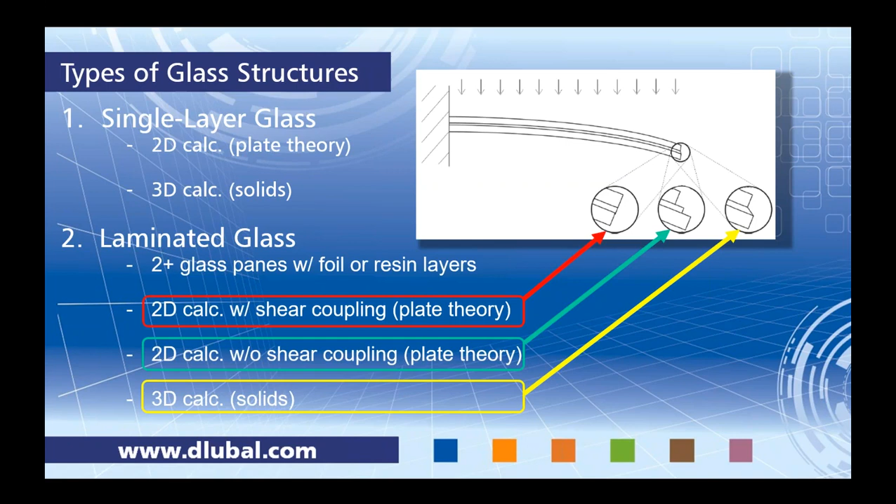Like I said, this is certainly the most accurate option. A downside to this, though, is that your solve time will be longer than typical plate theory.

Now, the third option is insulated glass, shown here in this picture. We have two glass panes on either side, a primary seal, a secondary seal, and then a spacer with our gas in between the two glass panes.

This will always use large deformation analysis. With the other two glass types, we can do a linear analysis or a large deformation, and typically with plate theory, you're running a linear analysis. But for insulated glass, we actually only give you the option for 3D calculation with solid elements. That's because when you throw in this gas layer, there's really no other way to get the accurate behavior of the shear coupling between the glass layers with anything other than solids, meaning that plate theory with 2D elements is not applicable for insulated glass.

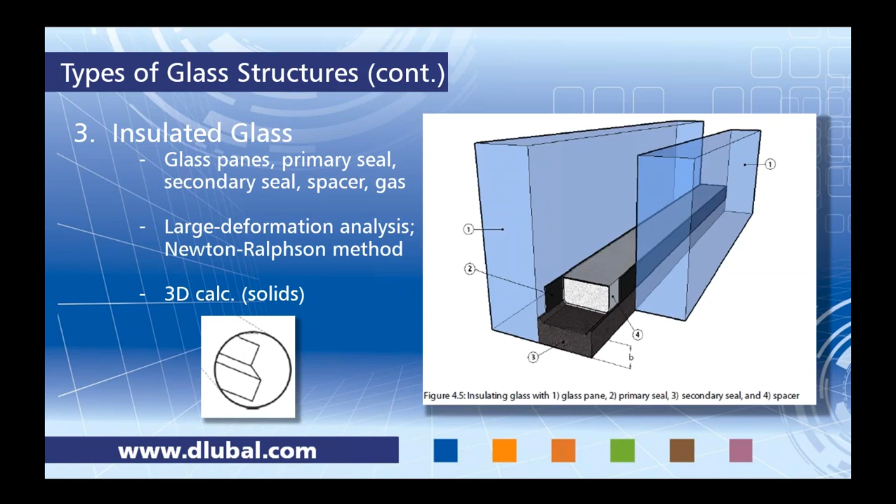I want to now discuss the calculation types in RF Glass. Over here on the right is our add-on module, RF Glass, just a dialog box. Down at the bottom, you will see that we have two different calculation types to choose from, either local or global. This section might seem a little confusing now, but as we run through our examples today, it will make more sense.

So the first being a local calculation. That is where an individual glass surface is analyzed in RF Glass. Despite having any supports or boundary members drawn in RFEM, we have to redefine those supports and boundary members in RF Glass. With the local calculation, we can either do a 2D or 3D plate theory or solid analysis. And with insulated glass, this always falls under the local calculation because, like I said, we can only do a 3D analysis type with insulated glass.

Now, the other option is a global analysis where the entire model in RFEM is considered. So therefore, things like supports and boundary members that were originally modeled in RFEM will be taken into RF Glass. The caveat with this is that we can only do 2D plate theory for this type of analysis. You can see here from this picture essentially what I'm talking about.

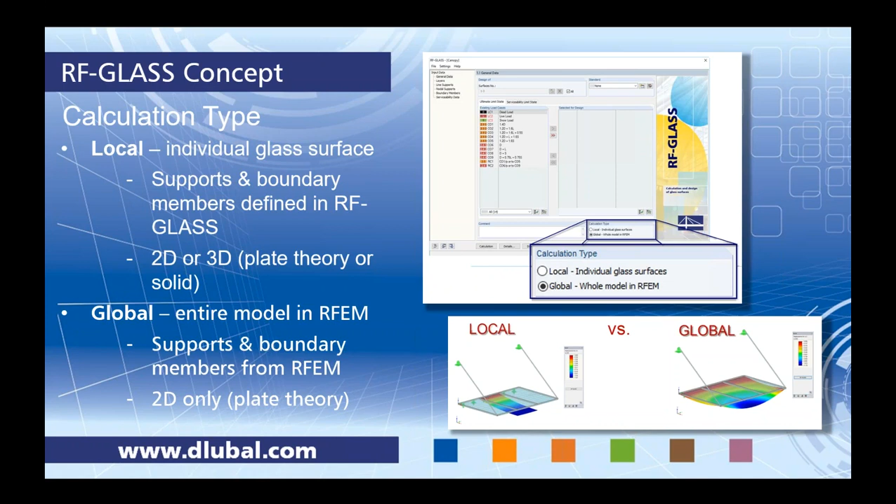The other reason being that the support types as well as the boundary members can be identified in RF Glass in much more detail than what you could ever do in RFEM. So that's kind of the advantage. Again, we'll see that when we go through some examples today of local versus global.

So with that, we can jump into RFEM. When you begin a new model, you will see this general data box pop up. We just need to first give it a model name, so I gave it some arbitrary name. I have the load combination set to ASCE 7. You can see here that we have the Canadian load combinations as well as many international codes as well, and then I have the checkbox to create those combinations automatically.

I also always open up my template model. Any model can be saved as a template model, meaning that maybe you have your grid settings the way you'd like, your printout report, your unit set exactly how you want. So then every time you open this template model, everything is ready to go. You don't need to adjust anything next time when you open up a new model. So if I click OK, then this will go ahead and open up a new model for us.

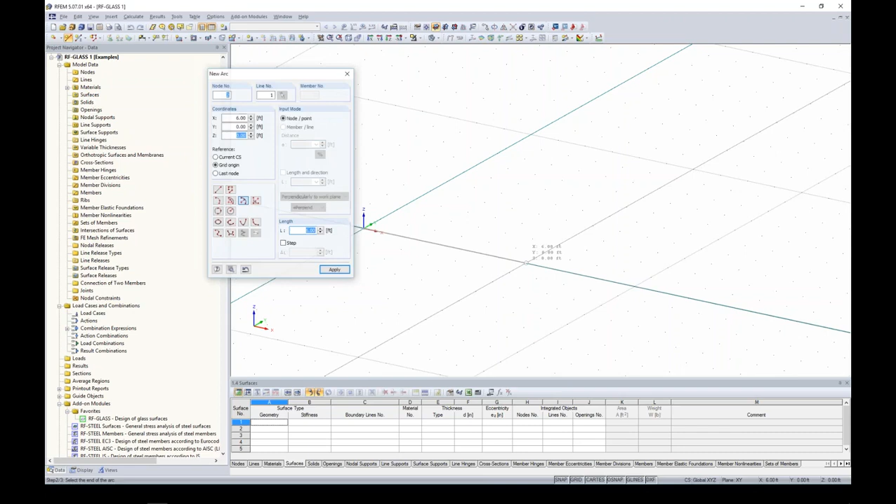For this option, I'm going to choose an arc by defining first my points at 0 and 0, and then I'm going to use my snap point to 6 feet. Now you can see I want to define my radius. I want to actually reverse the orientation and define my radius at 6 feet.

So now I just have a simple line element. This isn't a member, it's just a line. And then I can actually select this line, right-click, and extrude the line into a surface.

If you were present in my last webinar on cross-laminated timber, the glass module somewhat acts the same way. The program is asking us now what material do we want to use when extruding this line into a surface. Realistically this doesn't matter right now for glass - this concrete is just a placeholder. So it doesn't matter if I choose concrete, steel, or aluminum; it's simply a placeholder.

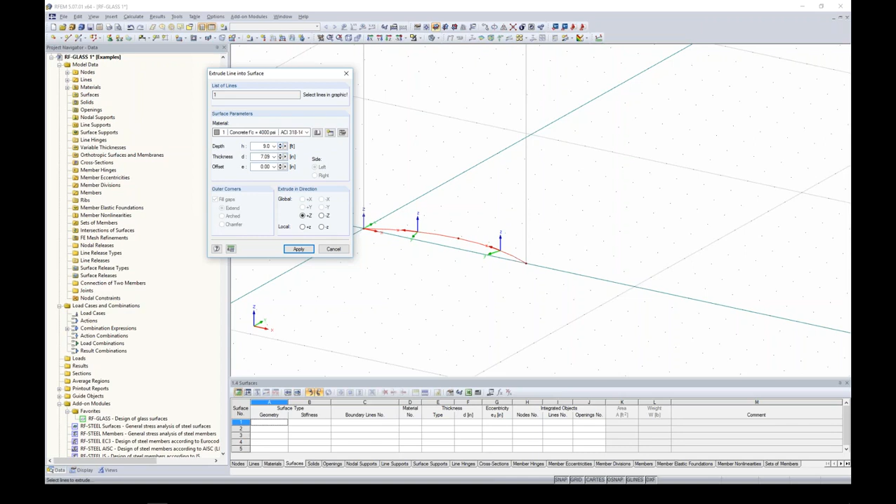The height, though, we do want to specify the correct geometry in the program, with the exception of the thickness. Thickness doesn't matter either because all of our layers and such we will be defining in RF glass. So if I hit apply, then I can see that I have this surface now created with just a few clicks of a button.

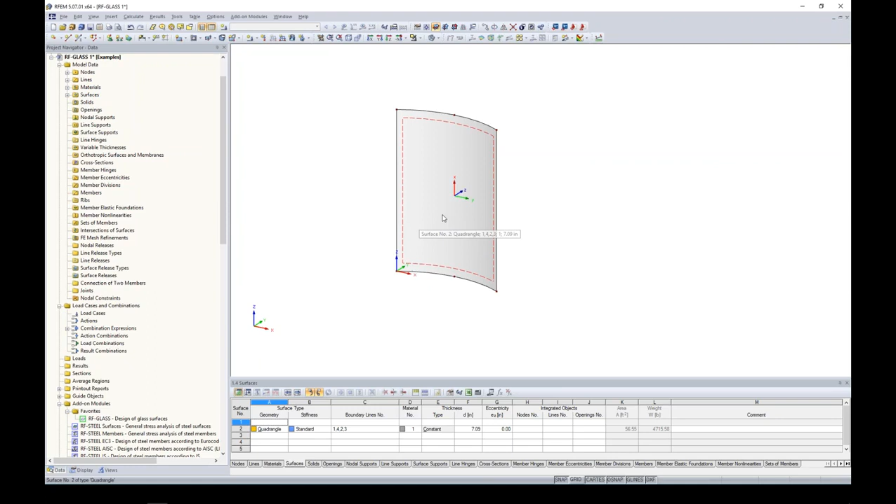The next thing to consider is maybe we have some type of handrail on our glass panel here, and I don't want to model the handrail itself, but I'd like to create a line so that I can add in a line load to this surface.

So all I'm going to do is select this bottom line here and use my move and copy tool and move it up 3 feet in the positive Z direction. Now you can see that that line is integrated in that surface.

So quickly adding some load cases, here I will go ahead and add my first load case, dead load, and you can see that the self weight is automatically checked on for self weight.

I'm going to create a new load case called wind load pressure. You always want to define the correct action category, and the reason why is the program automatically created all of these ASCE load combinations. If you don't apply the correct action category, then you're going to get the wrong load factors.

So I'm going to make a quick copy of wind load pressure, but call this one suction, and then make one more load case of live load and give it the live action category. Okay, so I can click OK here. Now, if I go to my drop-down box, you'll see that the program automatically created all of those ASCE load combinations. I'm going to skip dead load for now.

We'll just consider self-weight, but for wind load pressure, we want to add our first surface load on. If I right-click, I can turn on my local axis system, and I want to add a new surface load. Because we have a curved surface, I want to apply this wind load pressure on my surface in the local Z direction. You'll notice down here the little picture updates depending on what direction you're applying your load to, which is nice. So in this case, I want the local Z direction.

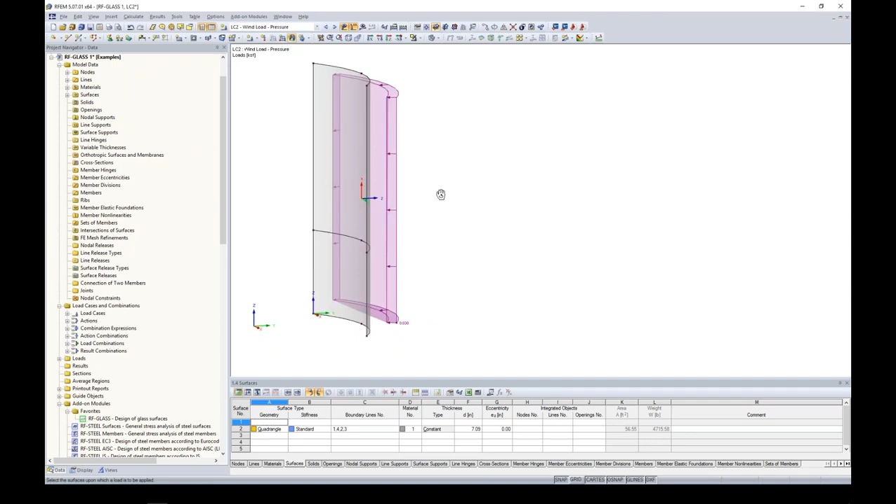I'm going to switch load cases to suction. I'm going to again add a new load in the local Z direction, but this time it will be 0.02 KSF on the other side.

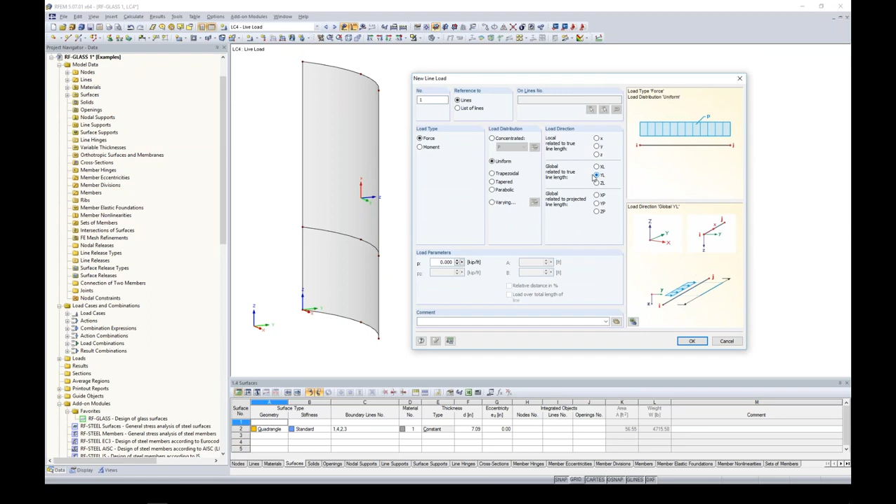And then lastly, we have live load, where I will add in a new line load. This I'm going to apply in the global Y direction with a magnitude of 0.07. And then all I need to do is click on that line.

So now we have all of our loads added to this surface, and all of our load combinations are done. I want to check my finite element mesh settings. So if I go to calculate and FE mesh settings, the default is set at 1 foot.

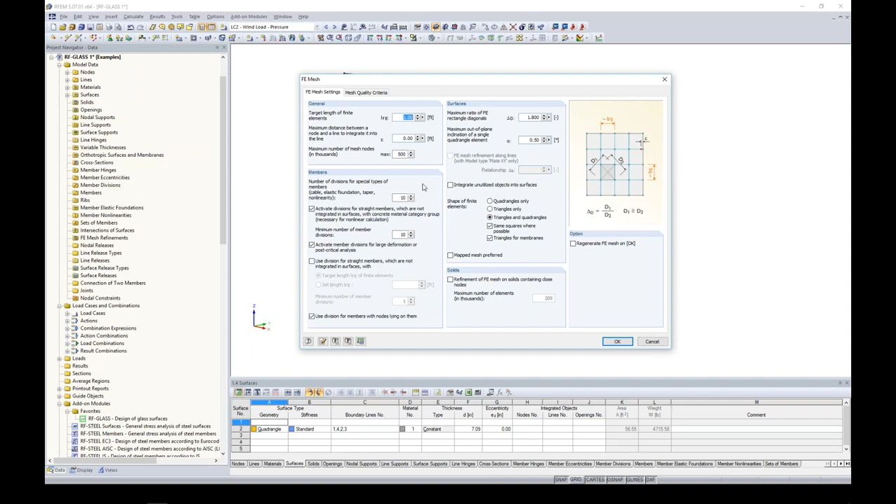The length of 1 foot would probably be okay in this situation since we don't have much going on in this surface, but it's only 6 by 9 feet, so maybe we want to decrease this to something more like 0.5 feet.

If I go to calculate, generate FE mesh, now we can see the FE mesh is automatically generated. Keep in mind this is different than some of the other programs in that all finite element meshing is done automatically. If I were to move this line up an inch, everything would automatically be readjusted, so you never have to worry about changes happening in your model and the finite element having to readjust manually.

Everything is done automatically. Now we are ready to jump into our add-on module. So we have this extremely long list of add-on modules, but if I right-click on any of them, I can select it as my favorite, which will automatically move it up to the top of the list. So now I can launch RF Glass.

Taking a look at RF Glass, as I mentioned, this is the add-on module, nothing more than a dialog box. You can see here that all of our load combinations were brought over from RFEM. The first question it's asking us is what surface do we want to design, and you can check the all checkbox since we only have one surface. Now the other thing to note is that we do have the German annex for the standard to go ahead and do glass design.

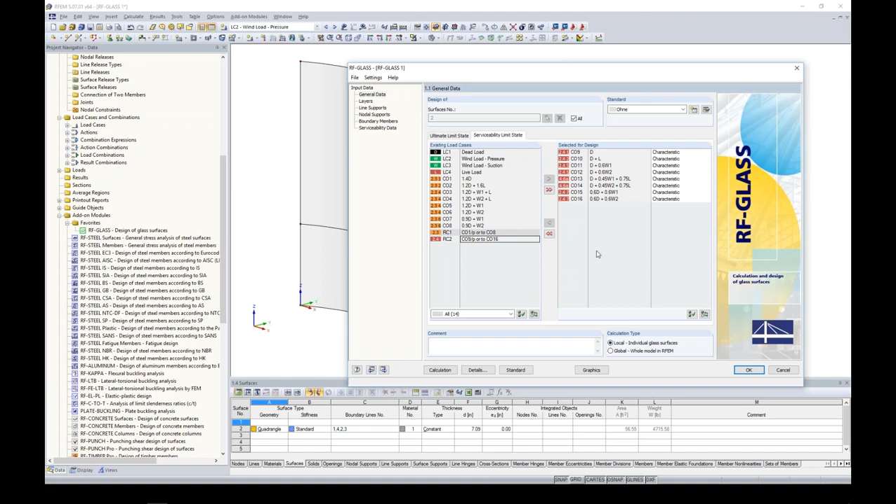And remember back to the PowerPoint, this is what we were discussing on local versus global. My two examples now will be local. So the first one will be local, individual glass surface. We'll focus on that and then we'll get into global a little bit later.

And with any add-on module, you just simply work down the list. Extremely intuitive to use. The program kind of sets up your workflow for you.

So we're moving on to layers here. It's asking us, okay, so we can create a new composition. You can rename this, and you can create as many compositions as you'd like for different surfaces in your model. For us, we'll obviously only have one composition for our one surface.

We need to select which surface this applies to, and we can define our first layer type. So our first layer type will be glass, and here will be the option to jump into our material libraries database. Typically the standard when you select this will be under the material category glass, and all of these options will be listed. We don't quite yet have the ASTM materials in there, but that's no problem at all.

I added this thermally toughened float glass to my ASTM standard. So anytime that you add a new material, this will of course be remembered for any future files or models that you create with this glass module.

All of our properties are shown in the same dialog box, so everything is okay there. Now my thickness, I want it to be 0.2 inches. Again, all of our material properties are shown to the right here.

Our next layer will be foil. And believe it or not, we actually do have a lot of ASTM foil materials already integrated in the program. For this particular case, I will use 20 degrees Celsius at 1 minute. Again, the foil material properties are shown here. The thickness of 0.01 inches is fine.

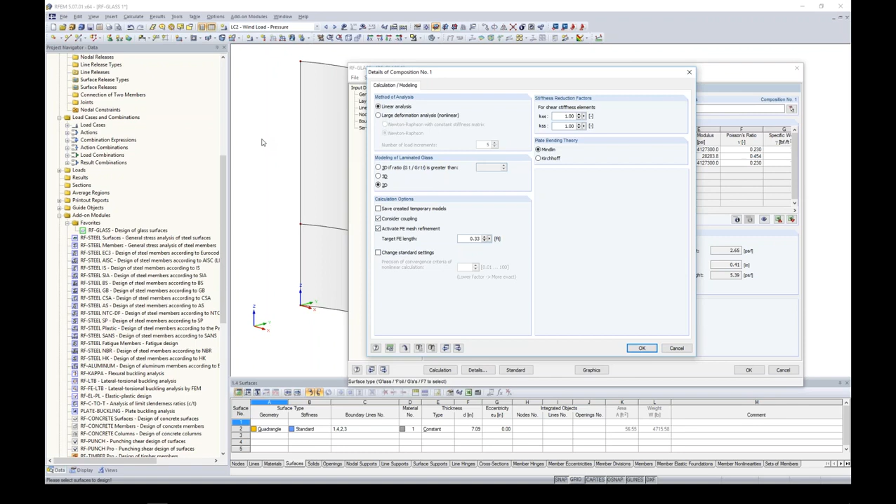Consider coupling. Remember, with plate theory, we either have rigid coupling or no coupling at all. If I uncheck coupling, I no longer have the option to turn it to a solid analysis. Activate FE mesh refinement—this is if you wanted to change your FE mesh of this surface only, or any of the surfaces you define for this composition. This is nice because I don't have to go back into RFEM and redo my finite element mesh if all I want to change is simply the surface in here. So that's certainly an option as well.

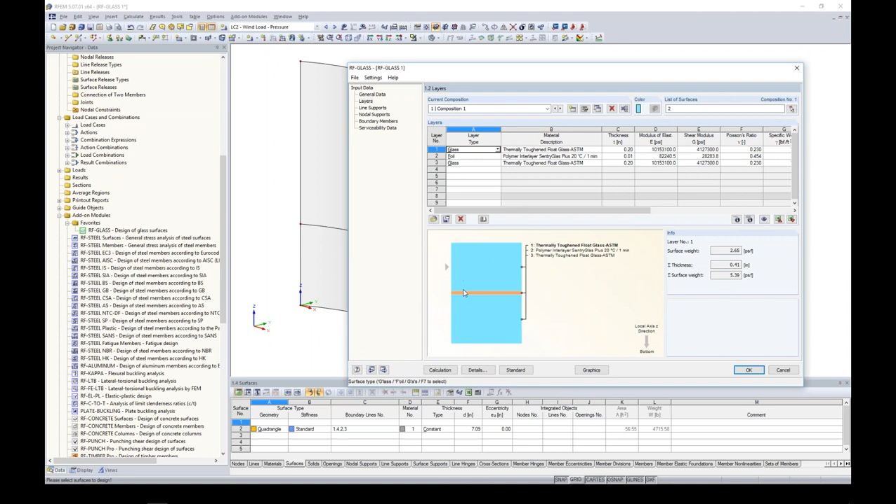Also notice we get this nice picture of the different glass layers. Depending on which line I'm clicking on here, this arrow will be synced with whichever layer is shown in this little diagram. Something important to note: the local axis Z positive direction is facing towards the bottom of the glass. So this is the bottom of the glass, and the positive Z axis of our surface is also pointing towards the bottom. For this example it doesn't really matter because we have symmetry between the top and bottom layers, but our next example will be different since we won't have symmetry.

So you want to make sure that the local Z-axis and the bottom of your glass are aligned correctly. Moving on down our list: line supports. In RFEM, I didn't define any line support, so if I were to try and run that model right now, I'd obviously get an instability because I have nothing supporting that surface. This is where, in RF Glass, we can go ahead and define these line supports.

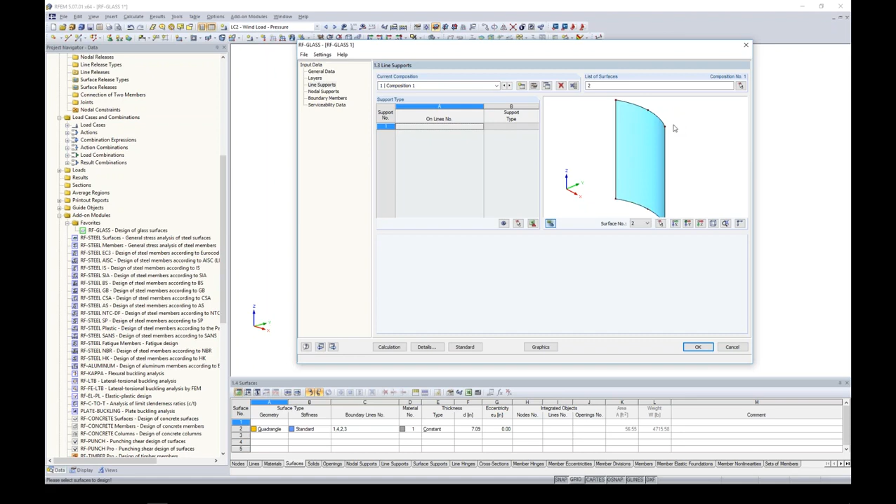The first thing I need to do—you'll notice here I have my picture, I can rotate it, I can scroll in—is to choose my first lines. So if I choose them graphically, using my AutoCAD-type features of just dragging a selection box, I chose the left and top lines here. And if I click on support type, you'll see all these different hinged options. As I scroll through these, you'll notice the support types are changing down here.

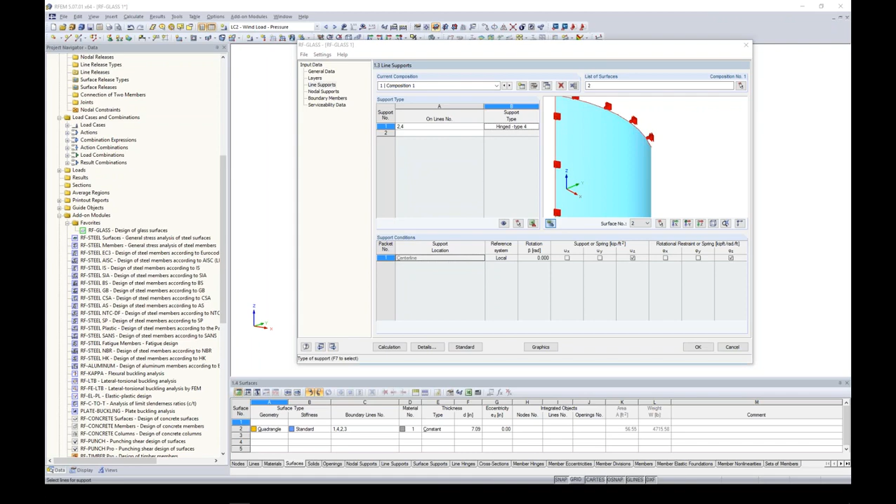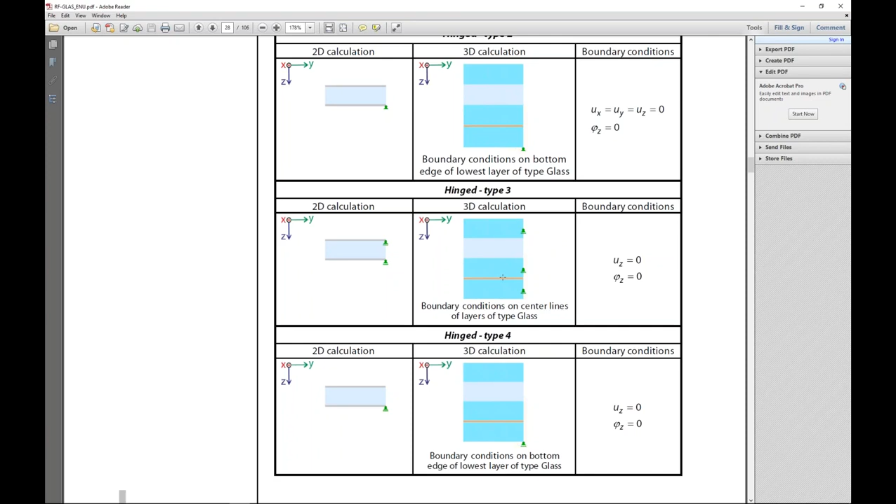If this still doesn't make a lot of sense, you can always click on this help manual here, which brings up our manual for RF Glass. If you scroll down a bit, here are all these different hinge types. It's set up nicely: if you're doing plate theory under the 2D calculation, this is how the hinge type will look. Now if we're doing a solid model, this is how hinge type 1, hinge type 2 would look. This is what I was saying—the benefit of using a local analysis in RF Glass is that you can get very detailed in how your glass layers are supported. In RFEM, you don't have these options; you can do it, it's just much more complicated. So in RF Glass, it allows you to get a little more detailed.

So for us, we will choose hinge type 3. Then I want to choose my other two lines here.

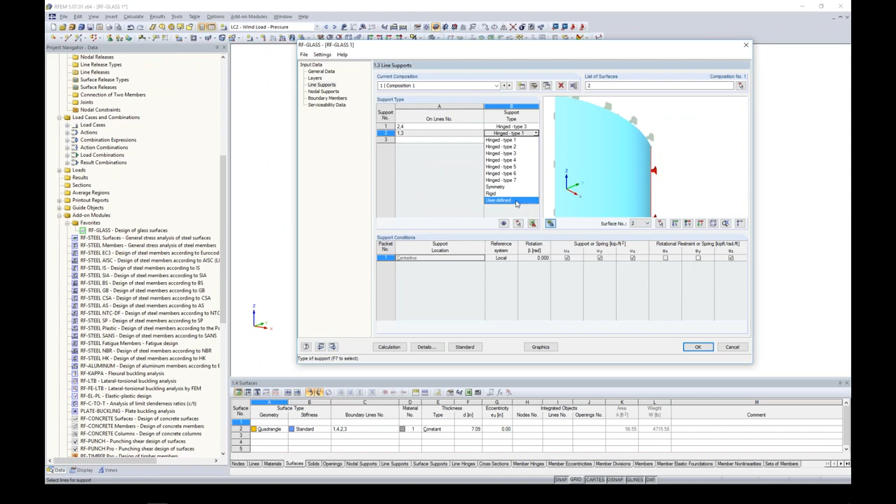And I can always select a user defined type as well. I don't have to use these already determined hinge types in here, and maybe I want to unselect translation in the X direction. Keep in mind you can always select springs as well, so you don't necessarily just have to have a free or fixed situation.

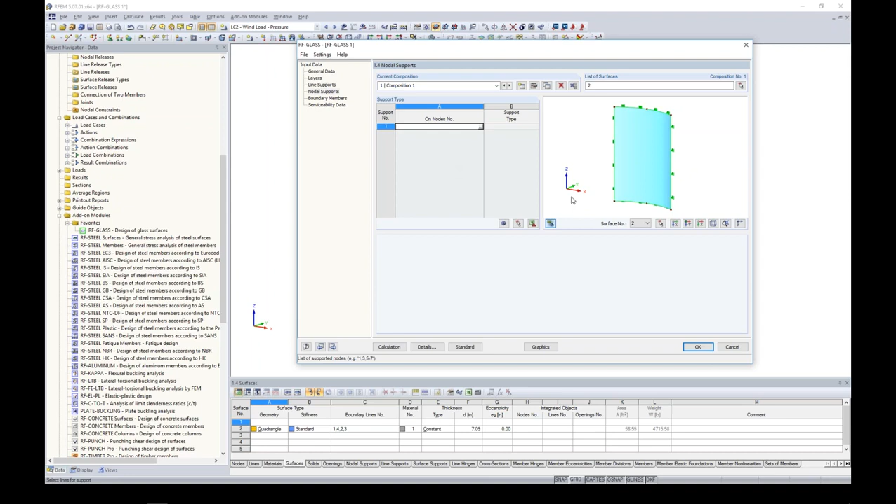Moving on down the line to nodal supports, exact same concept. Just if you were to have nodal supports instead of line supports, this is where you would go ahead and define it. Boundary members: it's not uncommon to maybe have something like a channel member up at the top here of our glass surface.

Well, I didn't model that in RFEM, and because I'm using the local glass analysis type, I want to define that boundary member here. So the first thing I need to do is select where I want that member to run. You'll notice that everything is just set to center line because I'm using 2D plate analysis, and I don't have any cross sections defined in RFEM. Normally you'd think you need to go back into RFEM to create some cross sections, but the nice thing is I can do everything from this add-on module.

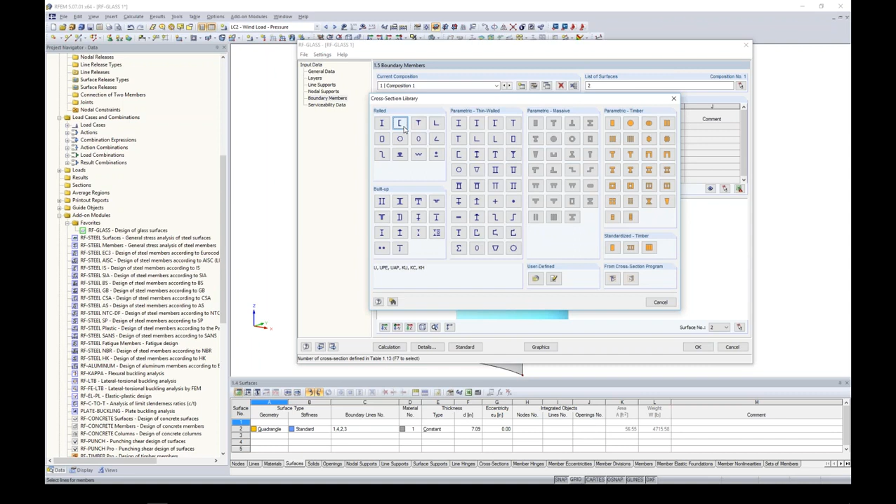So up pops my cross section library. For this case, maybe I'll choose a type of channel here just for geometry purposes, and here are all my AISC shapes. Maybe I want a 3x5.

Concrete is obviously not the right material for this, so we can easily edit this as well and jump into our material database. Maybe we want something more like aluminum from the ADM. Well, I already have aluminum set in one of my favorites group for USA as 6063 T6.

Here are all of my properties for that particular material. I can click OK in all of these, and if I zoom in, I have a nice rendered shape of my channel. You can also rotate it if you need, and the program will automatically update that as well.

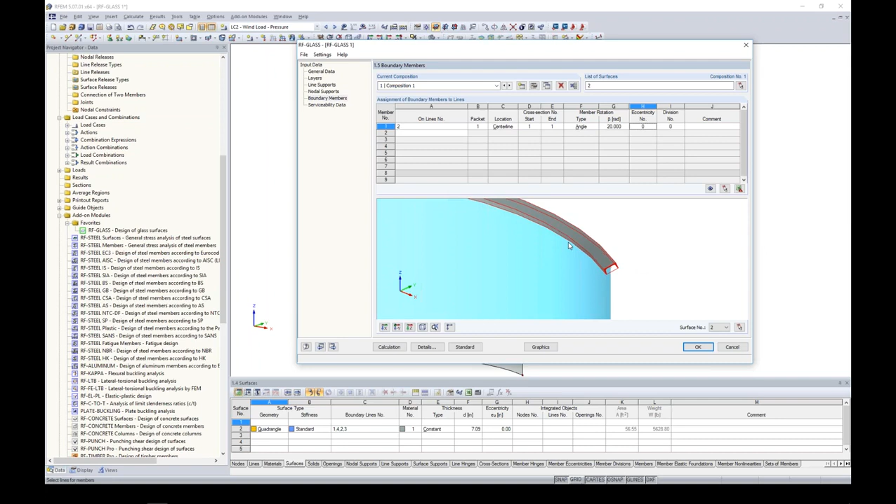So for analysis purposes, we certainly want to take into account the stiffness from this member here. That's the whole purpose of defining boundary members. Maybe you have a boundary member with nodal supports on either side instead of a line support. That can all be modeled in here as well. So this is just for example purposes, I will delete this for now.

And lastly, we will jump into the serviceability data. This is nice in the sense that if I go to my standard button down here, I have my serviceability limiting deflection ratios. I have 3 different types of combinations: characteristic, frequent, and quasi-permanent, and you can see that I can change these ratios for these 3 different combination types to whatever I'd like.

Default is L over 100, and for cantilevers it's L over 50. If I go back to my very first tab under serviceability, here's where those 3 different combination types fall into place. So if you want different limiting deflection ratios for these different serviceability load combinations, it's possible to do it in one analysis without having to rerun several times with different deflection ratios.

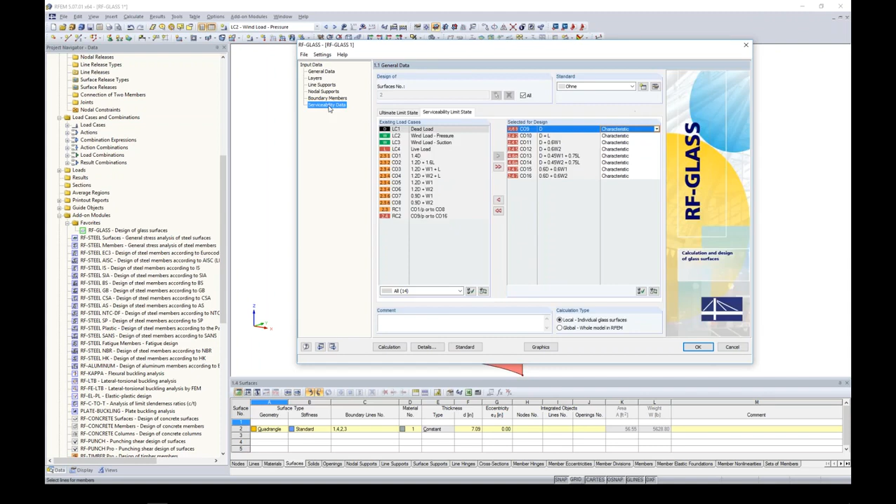The only thing I need to define is my surface. Now the reference length - do I want to use the minimum border line, the maximum border line, or do I want to define my own? In our case, a conservative option would be the minimum border line at 6.28 feet, and if it was a cantilever, I could check this option here.

Last thing to check is the details button. You can see that we have all of these options for what stresses we want to show in the final analysis. So I can easily uncheck any of these if I don't want to see them, or check them if I do. Under the results, there are a few other options for what you want to see in your calculations. For example, maybe we want to see line support reactions. And with that, we are ready to solve.

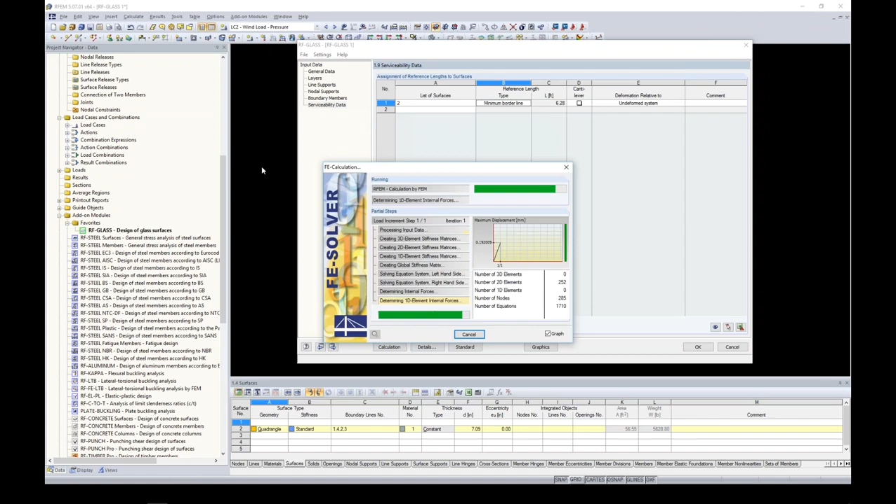So what the program's doing now is it's taking each stiffness layer from the glass, creating a more global stiffness, exporting it back into RFEM, rerunning the analysis, and now bringing all of the results back into RF Glass.

And now we have this results menu available. Here we can view our max stresses and our ratios by either the loading. So we have our different load combinations, load combination number 1, number 2, number 3, and remember this is ultimate limit design. We also have our max stress ratio by the surface.

We only have one surface defined, so of course we only have surface number 2 shown here. And then we have our max stress ratio by the composition. We only have one composition defined. And with this, we will get our different stresses for the different layers, layer number 1 and number 3. We have our existing stresses due to the actual load combination, and then we have our limiting stresses. And of course, we get a ratio.

The max ratio is shown down here. We have a nice green smiley face because he's well under 1.0.

The other thing to note is that you can export this directly into Excel. Excel obviously has a lot more capabilities in terms of sorting data and such. So this is a nice feature to have, if you want a little bit more control, just click the button. It automatically opens up Excel and brings all of your data in there automatically.

You'll see here that we have our stress diagram shown. We have a rigid coupling, so viewing the stress diagram, this makes sense for what we're seeing. We have obviously a relationship between our top layer and our bottom layer with our stresses, and in between is the foil layer.

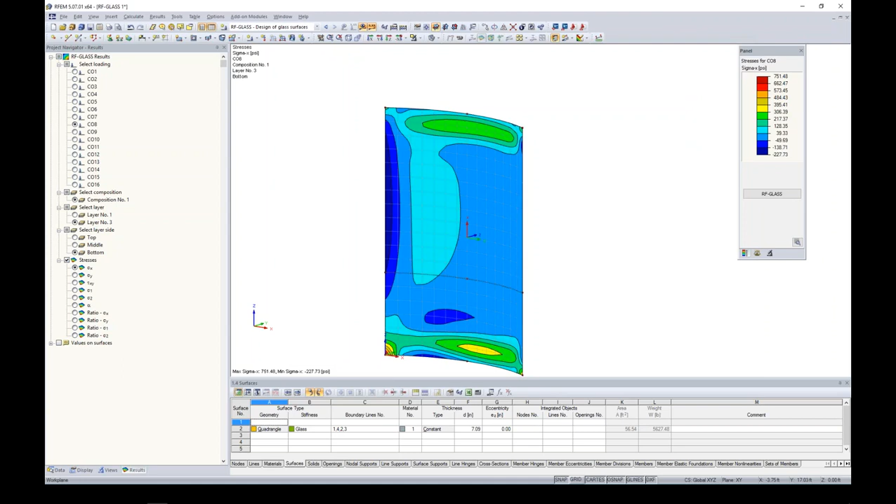Jumping back to the max stress ratios by either loading, surface, composition, there's another option down here called graphics. And with graphics, this will immediately bring us back into RFEM. And here we can view the different stresses by contour lines. So you'll notice that the results option popped up here in our project navigator.

If I look up here, it shows me that I'm still under RF glass. Even my drop down here shows me I'm under the results of RF glass, and here I can easily jump right back into that add-on module. So it's nice here if you want to visually see what's going on with these different stresses.

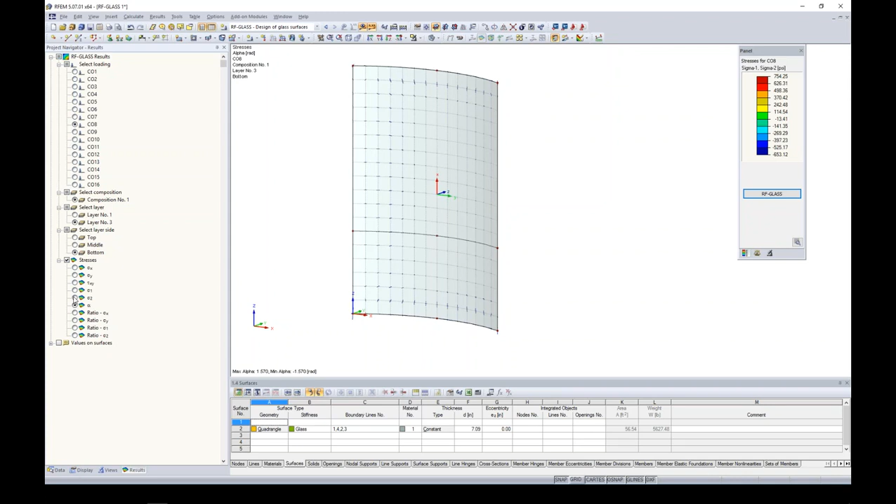Okay, so that concludes the first example. Now, for the second example, I'm going to use this same surface, but I'm going to turn this into an insulated glass example. Time savings, the geometry is already created, the loading's already created, and we're just going to see a lot of the similarities and differences between a 2D plate theory versus an insulated glass solid model.

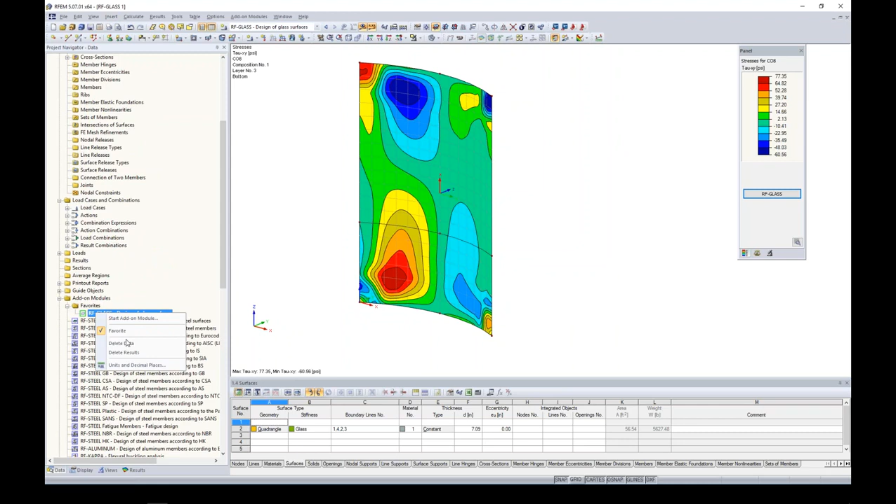I'm back in my data tab under my project navigator, and what I can do is actually just right click here on RF glass and delete all of my data. It's asking me, do I really want to delete this? Yes, I do, and we are back to square one with just a simple glass surface shown now.

So here I will launch my RF glass again, and we don't need to spend much time on some of this. One thing I do want to do real quick that I forgot, let's go back into our load cases, and I want to create one more load case here called climatic load. This is for my gas pressures of my insulating glass that I'm about to create.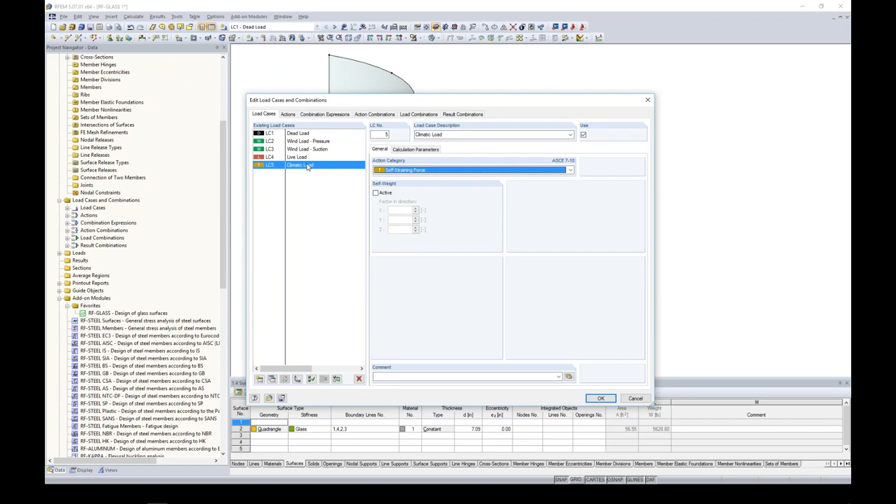I'm going to create a new load case here called self-straining force. You certainly can put your climatic loads into any one of these load cases that you want, but keep in mind, maybe climatic loads you want a load factor of 1.0. When you put it in with dead load, well, now it has the same load factors as dead load. So most likely you're going to want to keep them separate from these other action categories, which is why I created climatic load. This does have a load factor in our ASCE load combinations of 1.0.

So I can launch RF glass again. Now you can see that my load cases are a little bit longer. I now have this T for temperature included in here as well. So for ultimate limit state design, I'm choosing all of my LRFD equations, and for serviceability, I will choose all of my ASD load combinations.

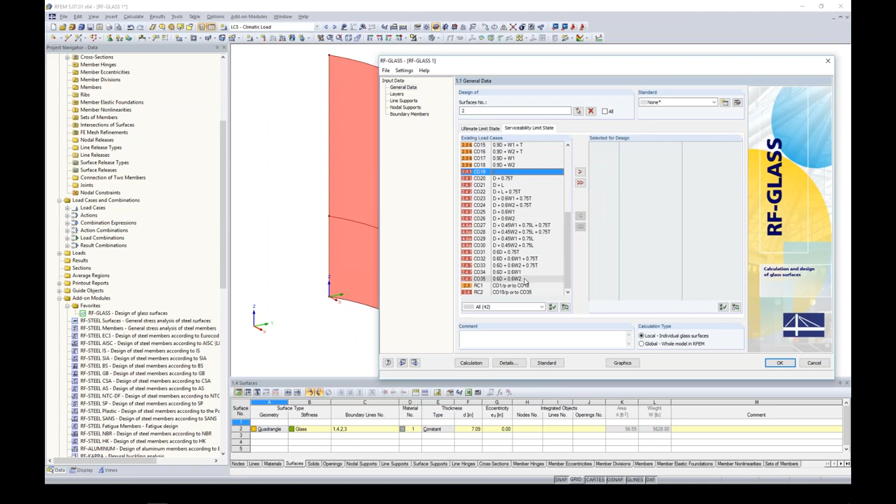We are still going to stick with the German norm here for our standard, and the calculation type will be local. Again, this is another local design, but you'll see here under layers that we want to first choose our surface. Nothing new here. Now our first layer type will be glass. The program remembers the ASTM. This time I want a thickness of 0.6.

And then I want to create my next layer of gas. The minute I put in a gas layer, the add-on module says, okay, this has to be a solid analysis. I can no longer do plate theory. That's just a limiting effect. When you choose gas, there's no way to do a plate analysis.

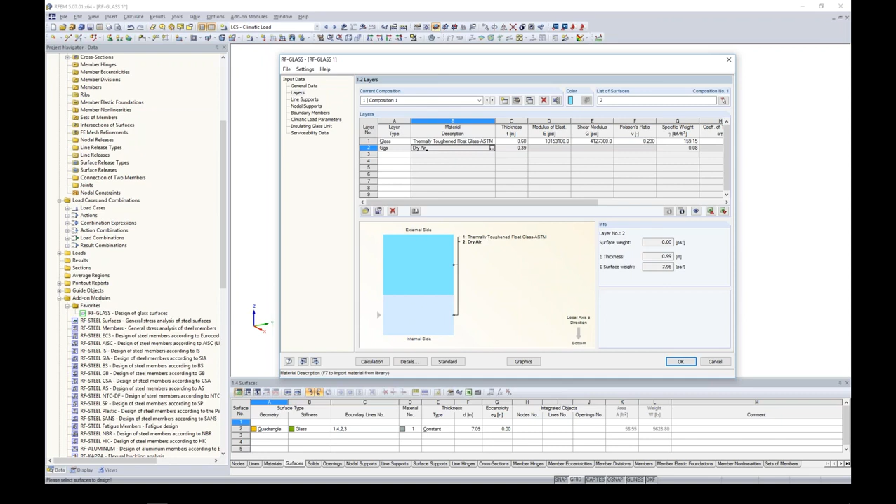For my materials library, for my gases, these are the options that are already default in the program. Argon is a pretty common one for insulating glass. Here are our properties, again shown here. Maybe I want my thickness to be 0.65. I'm going to choose another glass layer of 0.50. And then a foil layer, we'll keep it at 0.01, that's fine. And lastly, one more glass layer at 0.5.

Now let's take a look at our details of this composition. You'll notice some changes in comparison to what we were viewing last time. Linear analysis, no longer an option. We only can do large deformation analysis. As I mentioned, Newton-Raphson is the type of large deformation analysis we will do.

You do have the option here to choose a constant stiffness matrix. This will obviously speed up your calculation time a little bit, but maybe not as accurate of results because you're not getting that nonlinear behavior with the different stiffness matrix for each iteration. It's up to you though on which option you'd like to choose.

Number of load increments runs parallel with our finite element mesh. Anybody who's done finite element modeling knows that if you have an extremely large mesh, you can get very inaccurate results. However, if you continue to submesh your elements to something very small, your solve time also increases, and at some point your results aren't going to change very much. It's the exact same thing with load increments. Maybe one load increment won't give you the correct results, but maybe 10 is too many. It slows down your solve time, and your results aren't any different than what 5 load increments would have been. Default is 5 here, but you can certainly change this if you'd like.

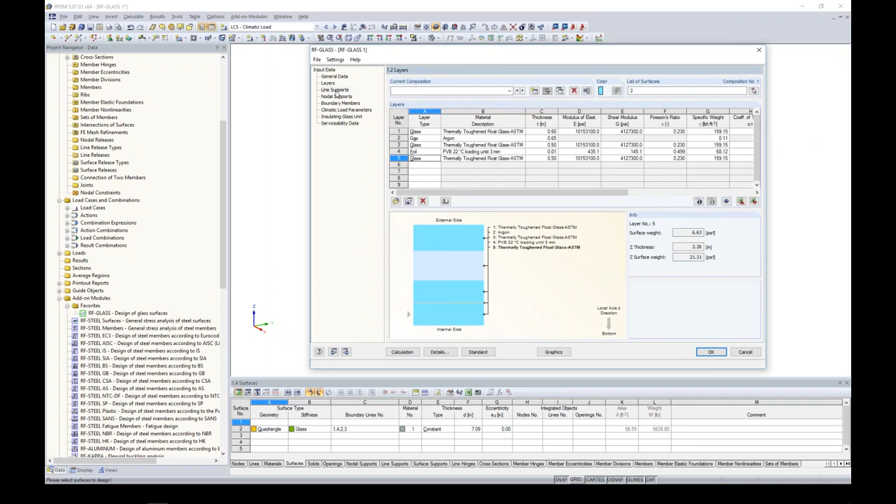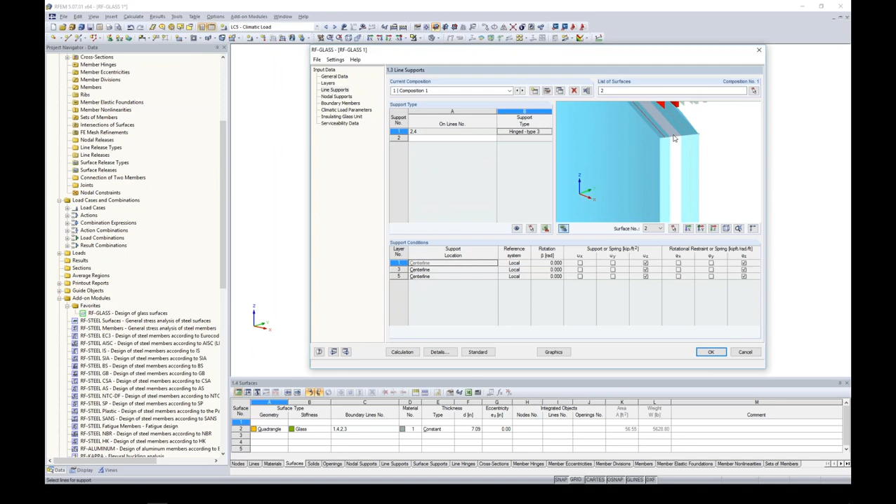Moving on down the line to supports, nothing new here for the most part, so I'll quickly run through this. There is one thing that I do want to show you. If I choose Hinge Type 3, just like we did last time, you'll notice now that I have 3 different layers, whereas before I only had one option. So with solid elements, if I zoom in here, you can see I have these different solid elements where I can apply these line supports at the different layers. As I scroll through here in the table, the little picture updates on which layer I'm at.

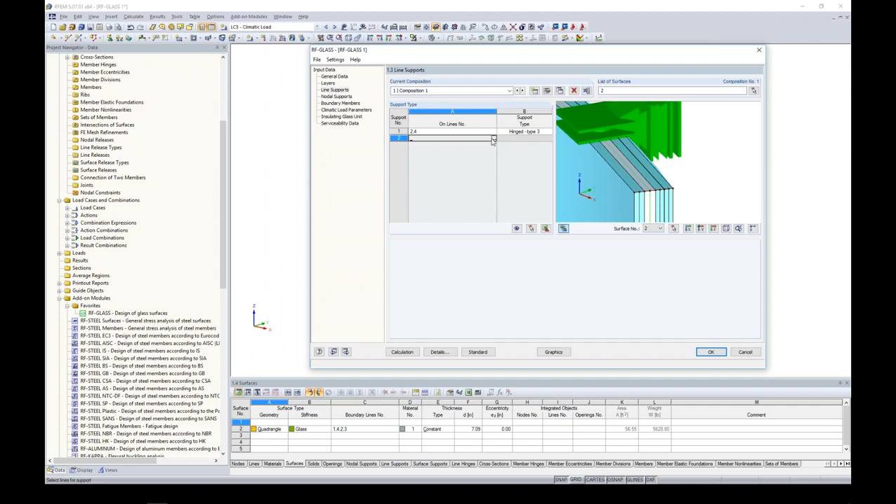So that's nice that everything is synced here so that I can see how exactly I'm applying these line supports. Same thing with the bottom line and the right line. Maybe we want to choose user defined here. I'm going to release translation, but now I need to do it for all 3 layers. Nodal supports, same setup - if we were to have nodal supports, we will skip this for now. Boundary members, same concept as well.

The one thing that I did want to show you though, if I do choose the top line again for, let's say, that channel, now I get to choose which layer I want to place that channel on. Again, scrolling down in here, if I choose layer 1, the picture down here will jump to that layer. I can also then choose upper edge, center line, or the lower edge within each layer of where exactly I want to place that boundary member. So this is what I was saying, that RF-GLASS allows you to really get detailed, especially with this solid model, and how exactly these supports as well as boundary members are framing into your glass panel.

Again, RFEM would not allow you to do this very easily. This is just for demonstration purposes once again, so we will delete this row.

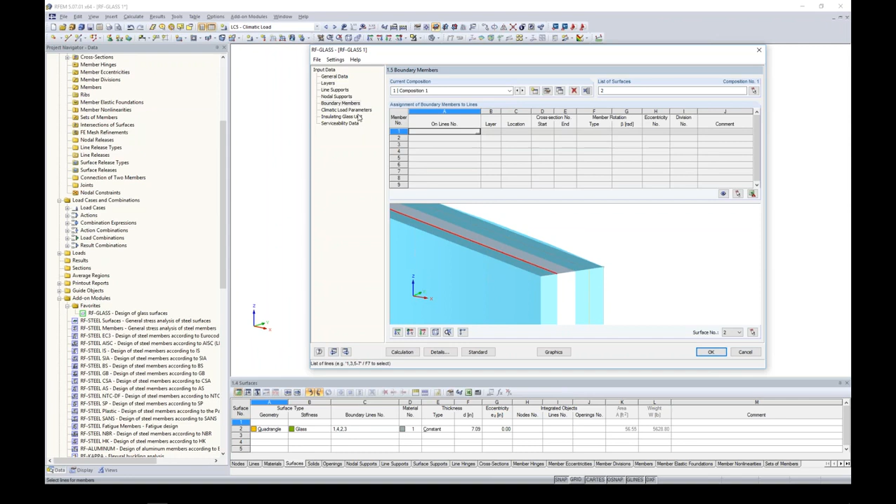Climatic load parameters - this is something new that popped up when we defined a gas layer. We probably need to take into account some climatic loads. There's this checkbox, automatic gas temperature calculation. If I check this, you'll see we get some very complex variables. Realistically, unless you're a glass expert who really knows what you're doing, you probably will never have this checked on. This is all kind of behind the scenes, but it gives you control over some variables if you want. I have a document write-up on this; if anybody wants to see it, feel free to email me, but I'm not going to cover it now.

With this unchecked, I think these are pretty straightforward, which is nice. The first thing it's asking is, where is this glass panel manufactured? The atmospheric pressure default is 14.7, that's fine. Let's say this glass panel was created at sea level, so we'll put in an altitude of 0. The temperature, let's say it's something more like 65 degrees.

Now mounting is the next option - where will this glass panel end up? Atmospheric pressure is set at 14.6, that's fine. Maybe the altitude is 2,000 feet, so the altitude difference is calculated. The air temperature, because this is summer, let's say it gets pretty hot at 90 degrees. The gas temperature can get up to 102, that's fine. Internal air temperature, let's say it gets up to 70 degrees. With these settings, the program will automatically calculate those gas pressures, those loads.

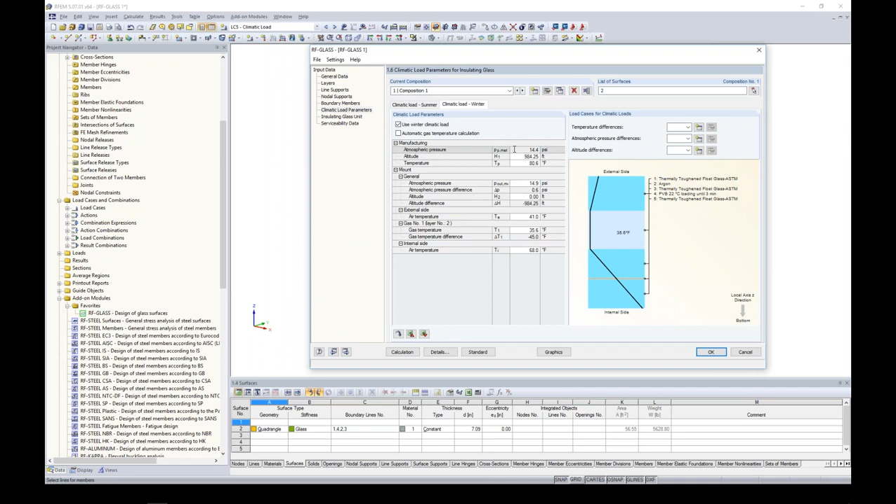Climatic load winter tab up here - everything's exactly the same. The only thing we need to do now is define our different temperatures for winter. So maybe the temperature in winter at sea level is 65 degrees year-round. Mounting, however, where this will end up, the altitude will be 2,000 feet. The external air temperature can get down to 20 degrees. The gas temperature, 35 degrees is fine. The internal air temperature, let's say, can get down to 62 degrees.

Now again, for winter, we need to go ahead and set our load cases. The program obviously knows that we'll never have summer and winter loads together, so it will actually create separate load combinations for summer versus winter. That's something you don't have to take into account - the program's smart enough to know that.

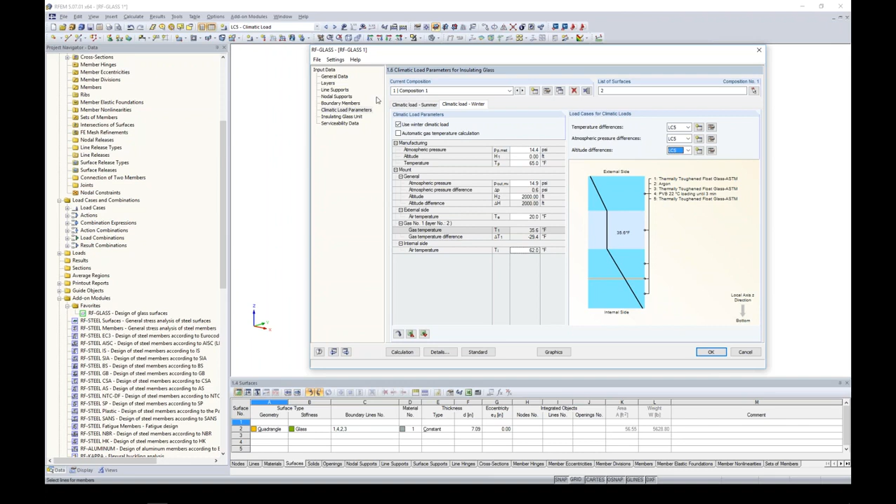Moving on down the list, insulating glass unit - here is where we can consider our secondary seal options. For this, I want to jump back into the PowerPoint quickly, because this is actually a little bit more complicated than what you would initially think.

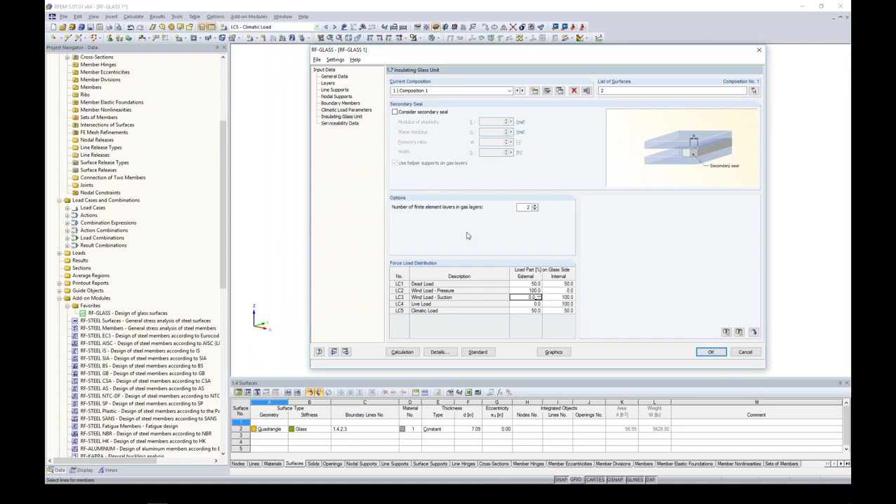Lastly, we have our serviceability data. Here we can just select the surface. It's applying it back to those service load combinations and the ratios that we've set here.

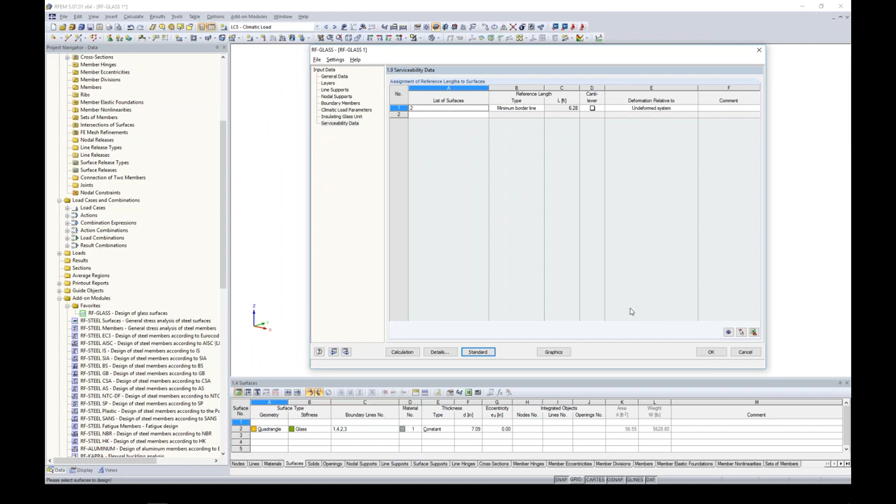And with that said, we are now ready to run an analysis. As I mentioned before, a solid analysis takes much longer than typical plate theory. So I already went ahead and ran this result because we don't want to be sitting around for a few minutes with nothing to talk about.

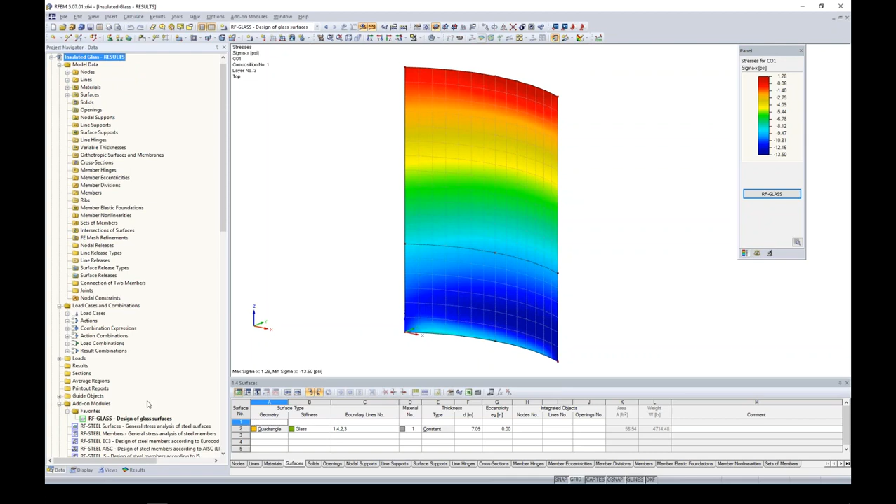So here are the results for this exact same model that we were running. Let me open back up my RF-GLASS module, and then this is what it should look like once we are done with the analysis. Nothing really too different from our plate - obviously, we're going to have more layers here for our stresses. You can see my max ratio is 0.99.

Maybe for design, this is a little bit high - we wanted something more like 0.9. Regardless, we still get our green smiley face because we are under 1.0. Again, feel free to export any of this data into Excel.

Pretty much the same thing that you would see before. The one thing I did want to show you guys is under, let's go to gas pressure, for example. You can see here the loading CO2 summer, CO2 winter. So like I said, the program creates 2 load combinations, one for summer and one for winter. Here you can see all of your different gas pressures.

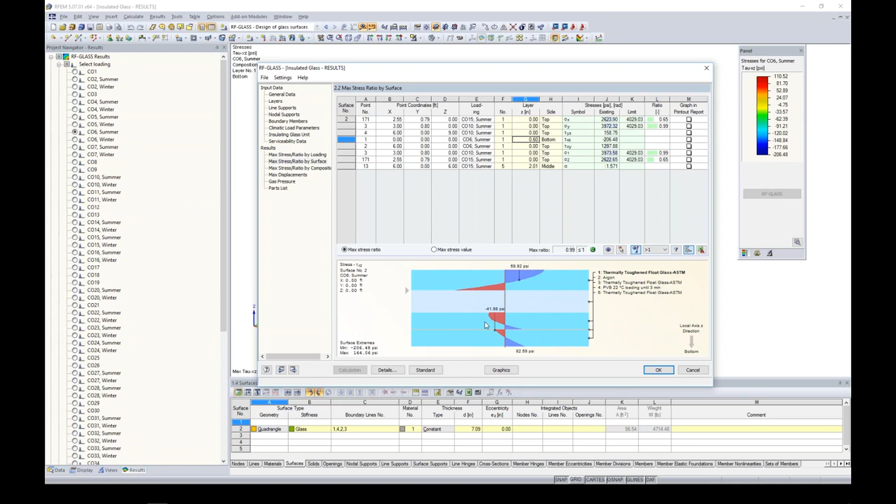Jumping back to one of these stresses here, we can see our stress diagram. Now we have our glass layer, gas - we obviously won't have any stresses - and then we have our other 2 glass layers. So with this, we get the accurate shear coupling behavior based on the stiffnesses of our intermediate layers, which you can see here is modeled quite nicely with these diagrams for each layer.

Jumping to our graphics, again, we have control over what stresses we may want to see graphically based on the contours. So nothing too different, essentially, than what we saw for the results from our plate theory.

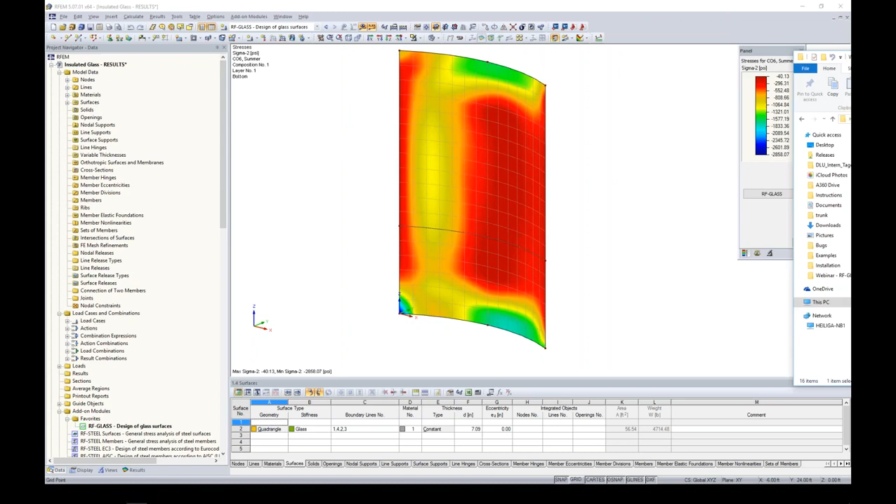Remember how I checked that checkbox to save the model in the background that it's creating? Well, if I show you my desktop, here are the model insulated glass results. I just saved it to a folder on my desktop, and automatically the program created these 3 models as well. I had nothing to do with creating these - they were created behind the scenes, and the program saves them because I checked that checkbox.

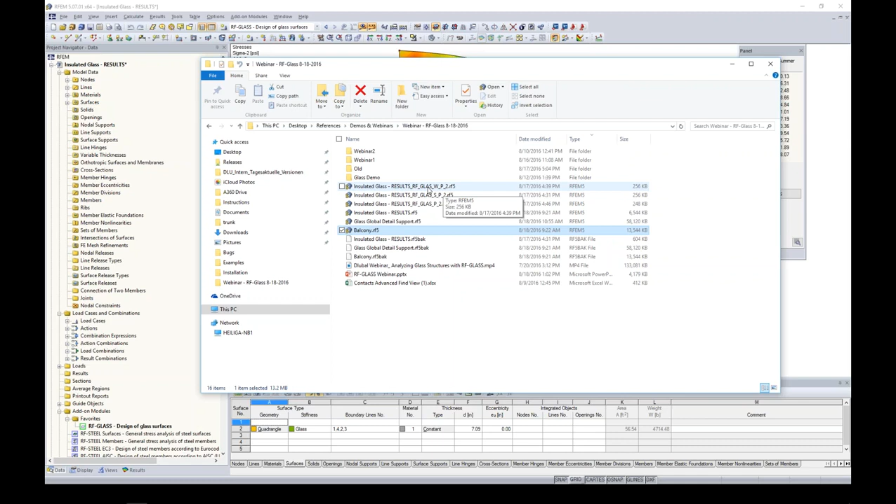You can see here we have W for winter, S for summer, and a third option which doesn't include climatic loading. If I open one of these, let's say the winter one which I already have pulled up in my program, this is what I was talking about when I said it creates this model in the background. I can zoom in here and see my solid elements.

I have my first solid for my glass layer. There are 2 layers here. If I zoom in really close, here's my foil layer, here's my other glass layer, here's my bigger gas layer, and then I have my other glass layer. I can turn this into wireframe too to see what's going on.

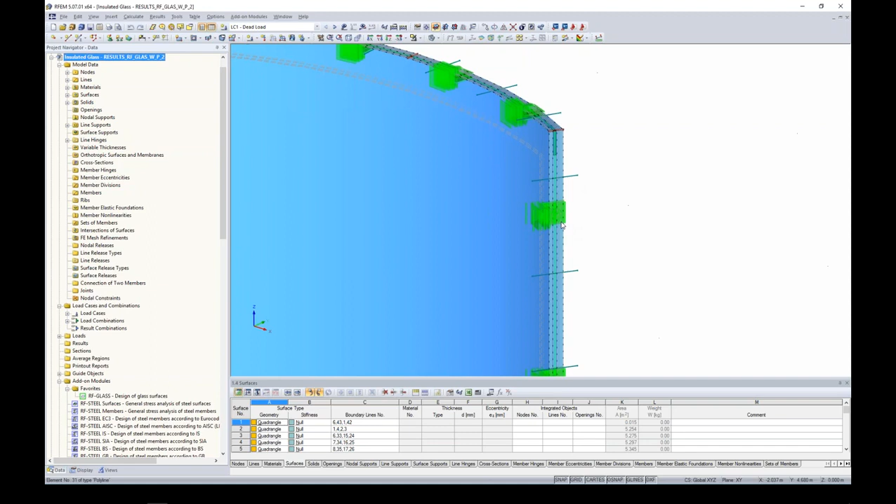Now the other thing to notice are the supports at all the different layers. This was everything that we defined in RF Glass. Like I said, you could sit here and model this in RFEM, but it's going to take a while, whereas in RF Glass you just give it some properties and the program creates everything automatically - that would even include our climatic loading.

If I show you our new LC5 for climatic loading, we now have these surface pressures on our glass unit. So this is what's going on behind the scenes - the program is automatically creating this solid model for us. I wanted to show you exactly what that checkbox does when we want to save and see these models.

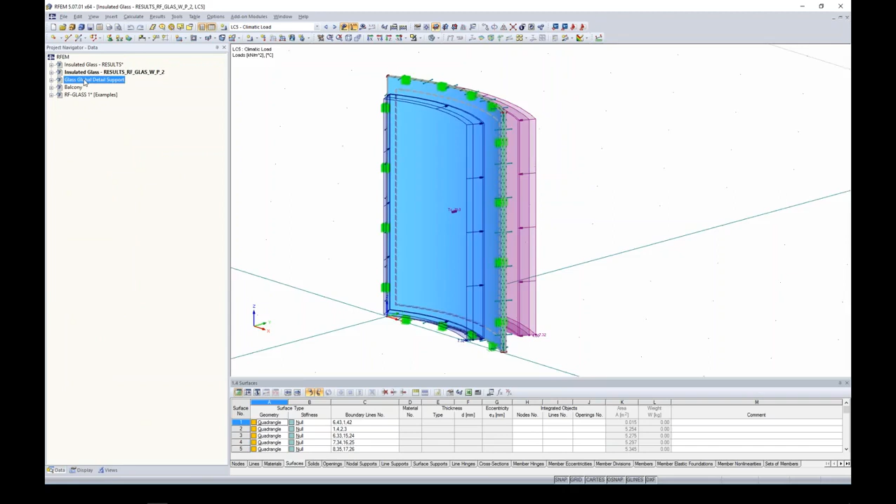Okay, so that concludes the local calculation types. So probably everyone wants to know, well, what about the global? Maybe some people are a little more interested in that. Well, let's take a look at this example here.

This was modeled by one of our glass engineers, and I'm going to quickly turn off the FE mesh and our FE mesh refinements. You'll notice people often ask, well, can you put holes in your glass? Yes, that's no problem at all. You can see here that this is a glass surface and we modeled a hole in it right here.

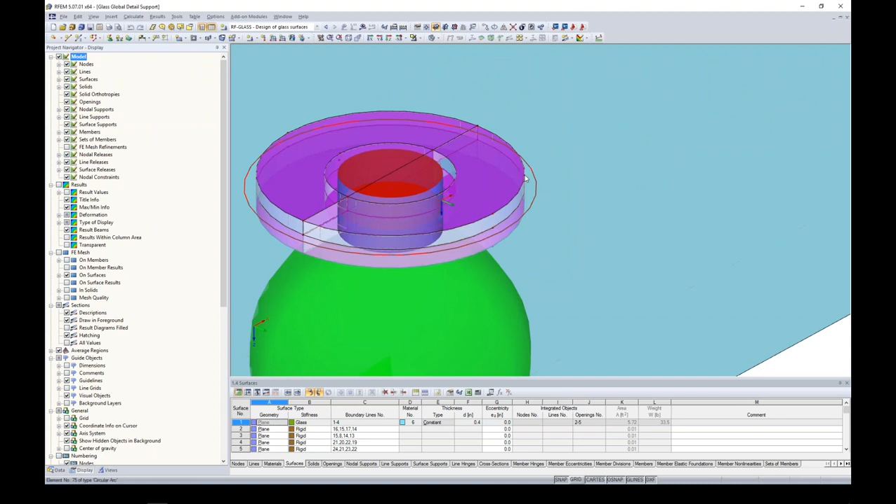Now what we also did was model a contact element, a contact surface. This top one, if we click on it, is a rigid surface. If I click on this middle contact surface here - sorry, let me zoom out - if we go into an elevation view, this is really an exact model of how this support will act with this glass panel.

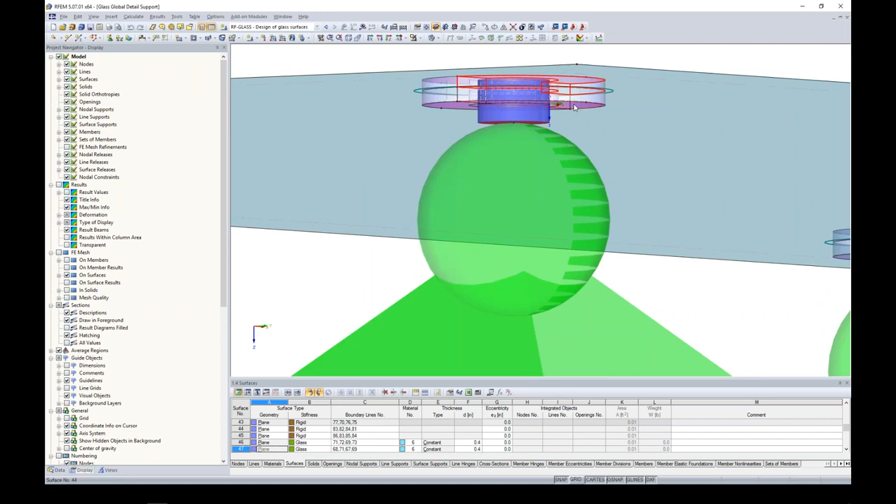If I double click here, I have a contact surface. Looking at my nonlinear settings, I have failure under tension - so basically this contact support will fail if any tension is experienced. And again, on the bottom we have another rigid surface. So this is just a more detailed modeling of the glass and its supports.

This is something that you obviously can't define in RF Glass - this was modeled in RFEM, our main program. So let me show you the finite element mesh too. Let me turn that back on. This is pretty powerful as well.

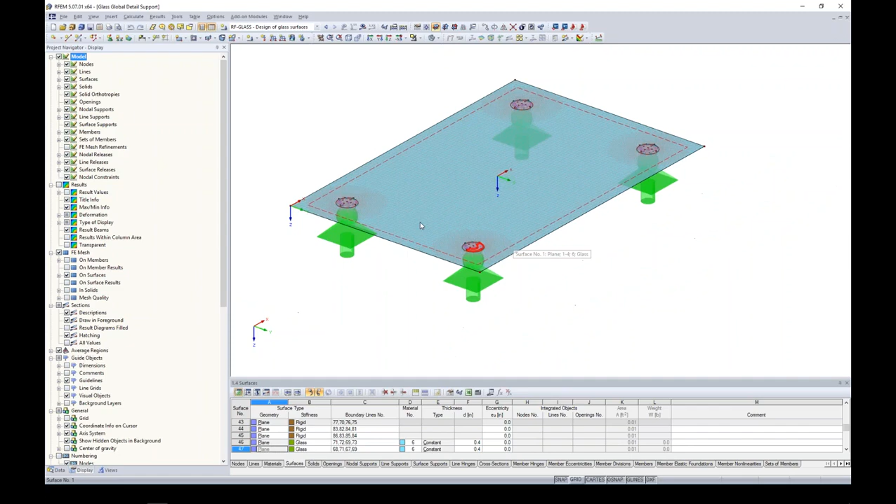So the finite element mesh you can see here is set at some arbitrary number. But the other thing we did is add some finite element mesh refinements here, and that's what these circles are about.

If I double click on one to take a look, we made a finite element mesh around a node. We set the inner length to something very small - full precision shows it's at 0.0003 - and the outer is 0.02 feet. So the program will gradually increase so that we have this smaller finite element mesh at the node here, which is kind of required because we're getting some small elements here.

Jumping into our RF Glass module, you'll notice under the general data - and I already ran the results for this - I now have global selected. And if I have global selected, take a look at the input data: I have a lot less options here. I don't have options for nodal supports, line supports, or boundary members. I have no climatic loading because I can't analyze any type of insulated glass here.

With global, remember that we can only do a plate analysis. So basically what the program's doing is taking all of our supports, all of the boundary elements, and pulling it from RFEM into this.

The only reason now that we're really using RF glass is to get the correct stiffness for our different glass layers. With this case, we only have one glass layer, thermally toughened float glass, so nothing too complicated here.

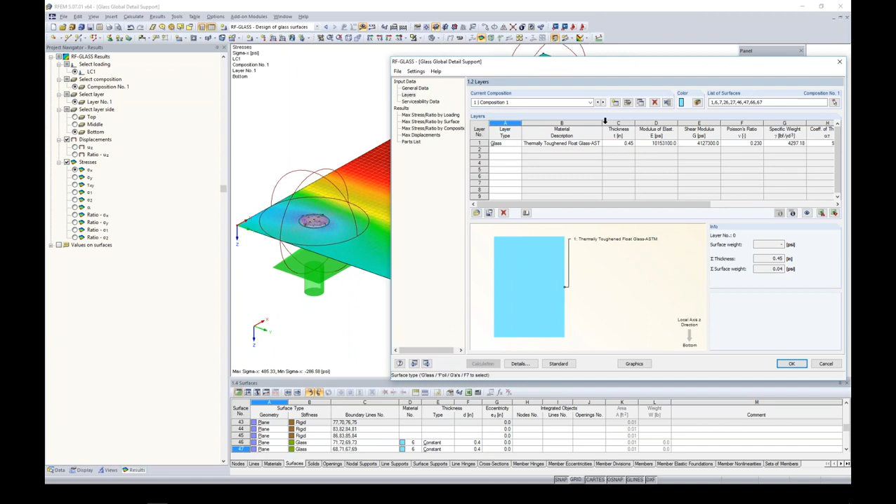We still can set our serviceability data according to those ratios, and then we can run our analysis. We still get our results here for our glass layer. Again, we only have one layer, so that's why our stress diagram looks as such with one layer.

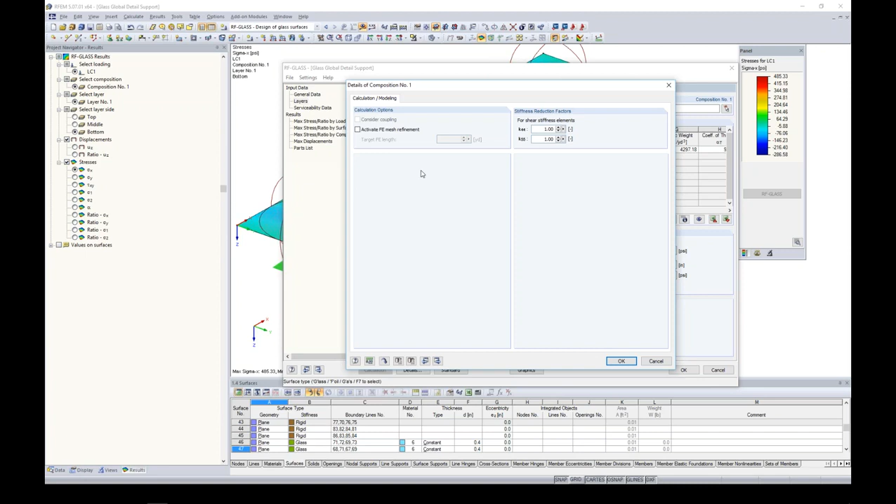Basically, we have the same output type as what we saw before, but keep in mind that this is a 2D analysis. If I go back to layers, I wanted to quickly show you this. Notice that all of the 2D, 3D, nonlinear analysis options are gone now with global. You no longer have any of those options. This is a 2D analysis, linear analysis.

Okay, so I can also jump back into my graphics, and we have these nice contours now of our different stresses. Maybe one thing we want to do is make a section cut through one of these.

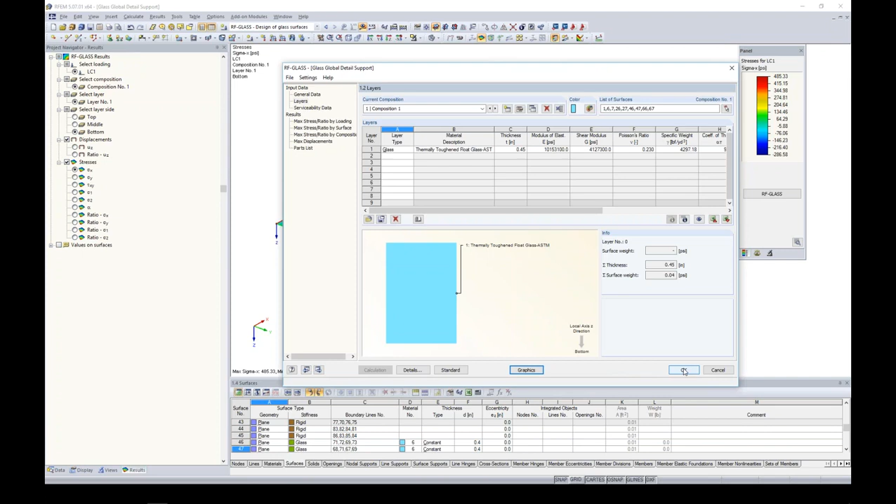Let me go back to graphics here. Okay, so we can create a section cut. I don't know why it's not letting me do that. Oh, probably because I need to go to the results.

Sorry about that. Okay, so choosing one of these section cuts, maybe I want a little bit more detail through these supports here, because the contours are nice, but we don't really get any numerical results. Well, here we can go ahead and turn on, let's say, one of our normal forces, sigma 1, and then you can turn on any of the stresses that you like. Here you can view it across that surface where we just made our cut for numbers instead of just purely contours.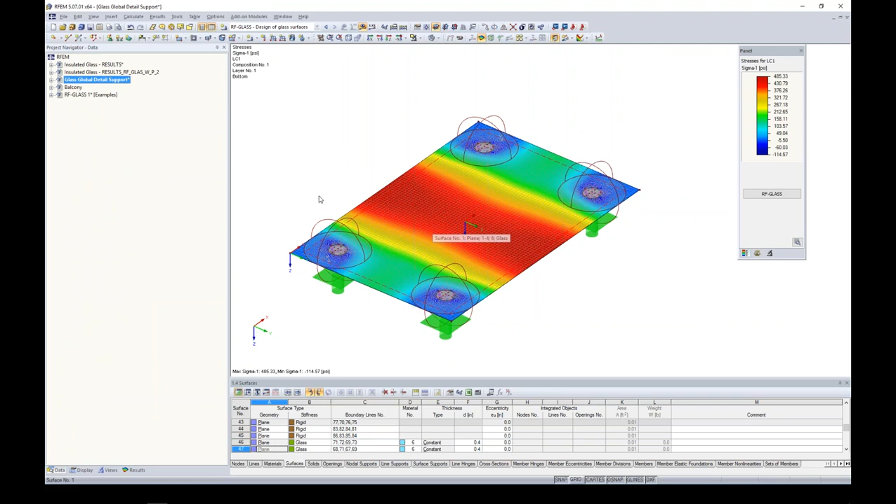And the last example that I want to show you guys, which is probably something you might have - maybe a full building modeled and you just have a glass balcony or a glass partition that you want to analyze with the rest of this building. So rather than this single glass panel here, maybe you want something more such as this.

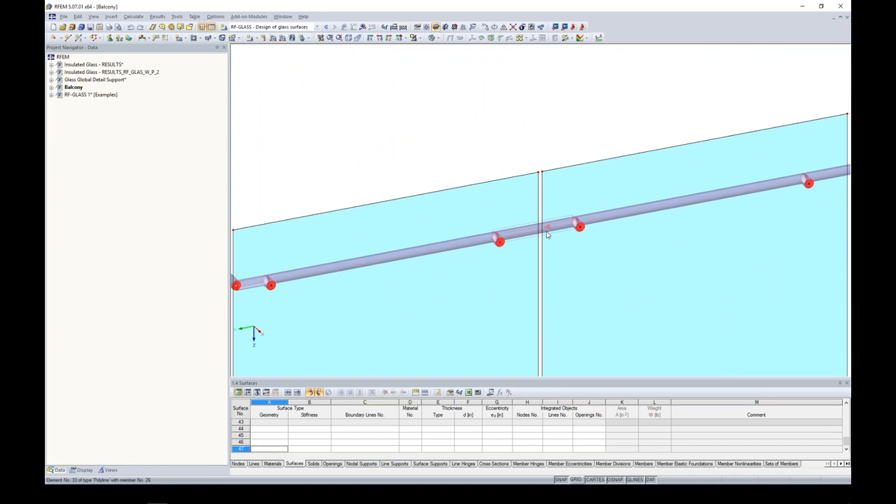This was modeled by one of our other engineers. It's basically a glass type balcony. You can see here if I zoom in, I have my different glass surfaces. There's a little gap modeled between them. We even modeled the handrail attaching to the glass surfaces by a single node. Then we also have these nodal supports at 4 different points.

I can decrease the size of this so that we can see it a little bit better. I have these nodal supports at 4 different points along the glass. We modeled in a little member to take into account eccentricity.

So this might be something more of an application where you have a bigger structure. You don't want to sit there and just model one glass element at a time. Keep in mind, though, you can always do a local calculation within a larger model. That's certainly possible - you don't have to have just a single surface in one RFEM model. So I could do a local calculation on just this single surface here.

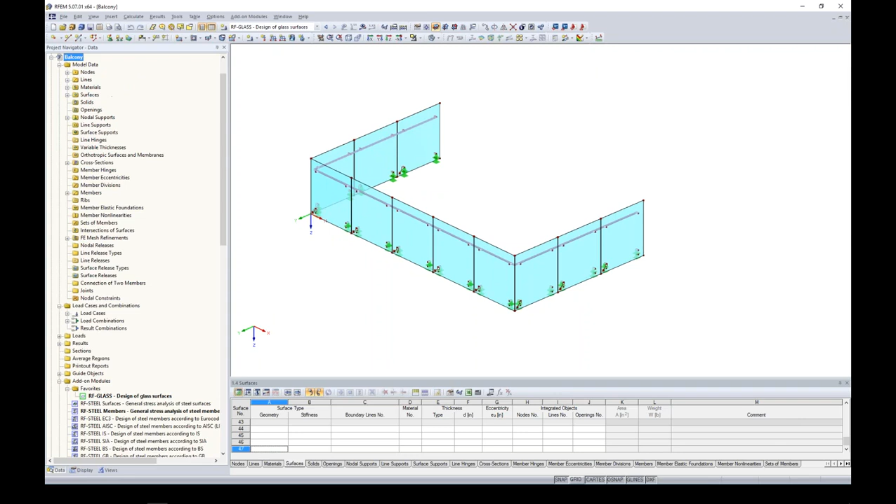So for this case, though, maybe we want to do more of a global analysis. I launched my RF-GLASS add-on module. You'll notice here I have global selected for the whole model in RFEM. Again, similar to what we saw before, this time I didn't consider coupling, so we'll see how the stress diagram is influenced by that.

So we have no coupling behavior between the different glass layers. Again, we have no option for 3D solids or nonlinear analysis because we are now in global. Here, though, are our different glass layers for laminated glass - serviceability data, everything's the same here.

Now, taking a look at our results with a max stress ratio by loading, surface, or composition, here's where that no coupling behavior comes into play. Normally, we'd see a stress diagram similar to this top layer throughout the entire depth if we had rigid coupling considered. But we have zero coupling considered, so we have no interaction between the top and bottom layers. That's why our stress diagrams are completely separate here.

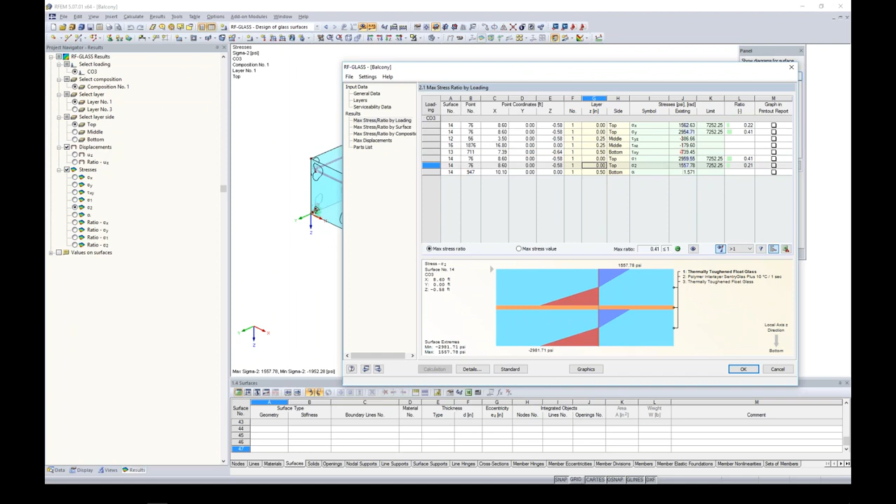Again, I can view everything graphically for my different stresses, which is beneficial. If I were to do a local analysis of one glass surface, I would need to take into account maybe the stiffness of this handrail coming in as a nodal support, so it gets a little more complicated, and I'd need to set these nodal supports with this eccentricity taken into account.

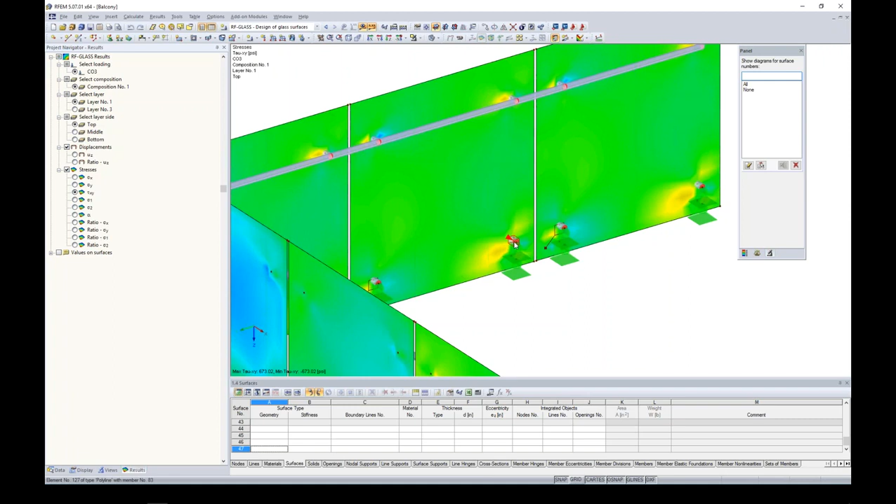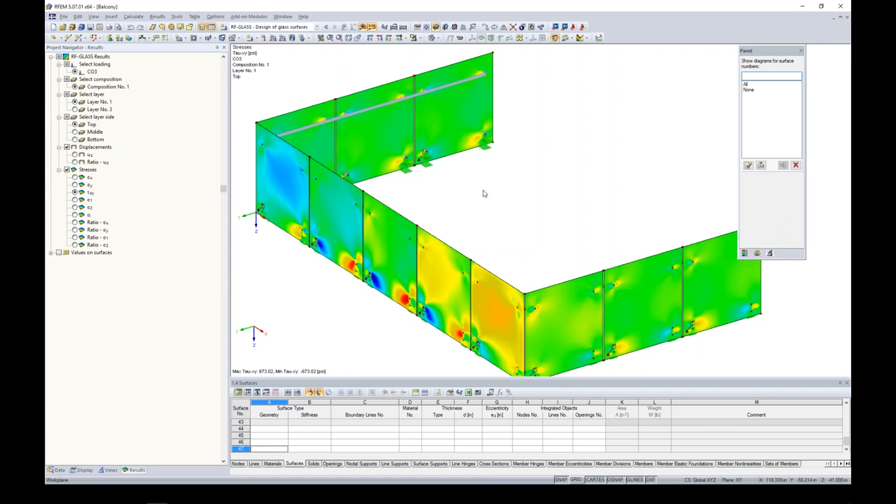So there's certainly some benefit to a global analysis, but again, if you have very thick layers of glass, a solid element would give you better results, or if you have insulated glass—which in this case you wouldn't have—just keep in mind that global isn't always an option. But for a situation like this, it's perfectly fine to consider plate theory, and then we get our results for the entire structure.

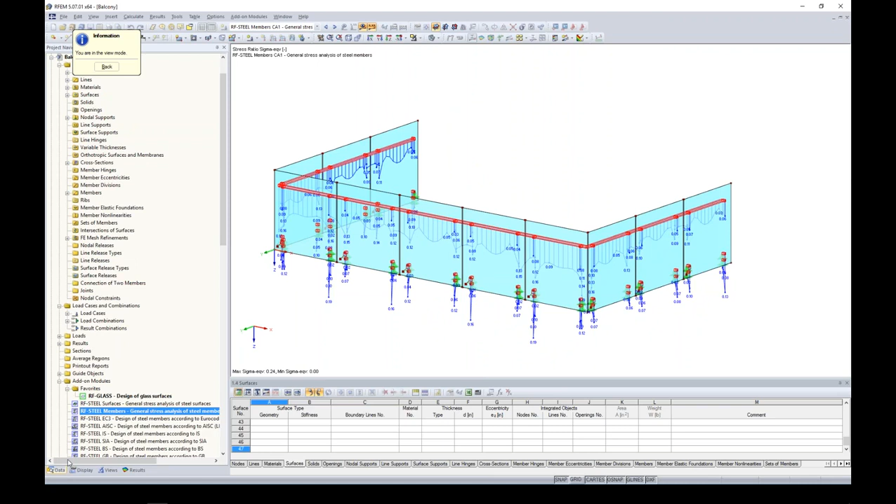The other advantage to this is tying it into other members in the model. For example, let's say we wanted to take a look at the results of our steel handrail. We have another add-on module called RF-STEEL Members that gives you a stress analysis of a steel section, comparing the demand stresses to the limiting stresses. With that, we can view the results graphically of any of the stresses and stress ratios for this handrail. That's what's nice about tying this in with a global analysis. And that sums up the global options here.

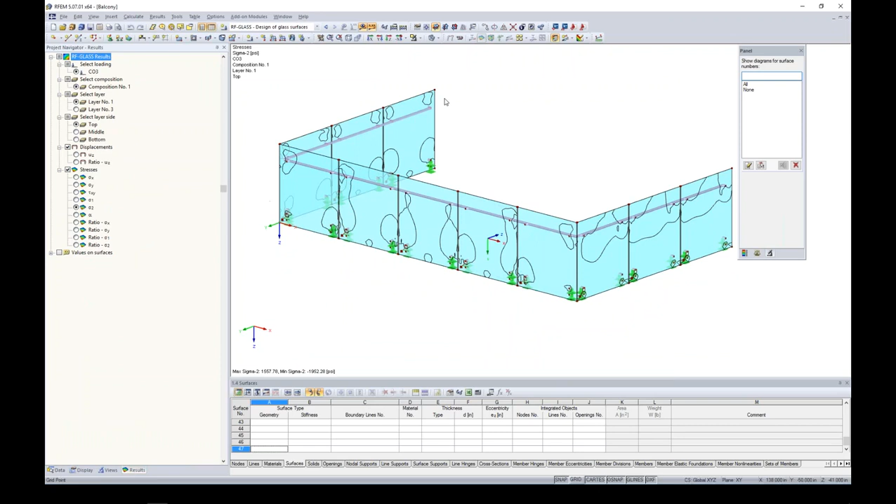One quick thing I wanted to show you guys, which I think is pretty powerful: let's jump back to our results for our RF-GLASS. Say we wanted to print off all of these different pictures of our stress contours. Normally in a lot of other programs, you'd need to take a picture, put it in your printout report, come back, change a view, take another picture, and put it in the report.

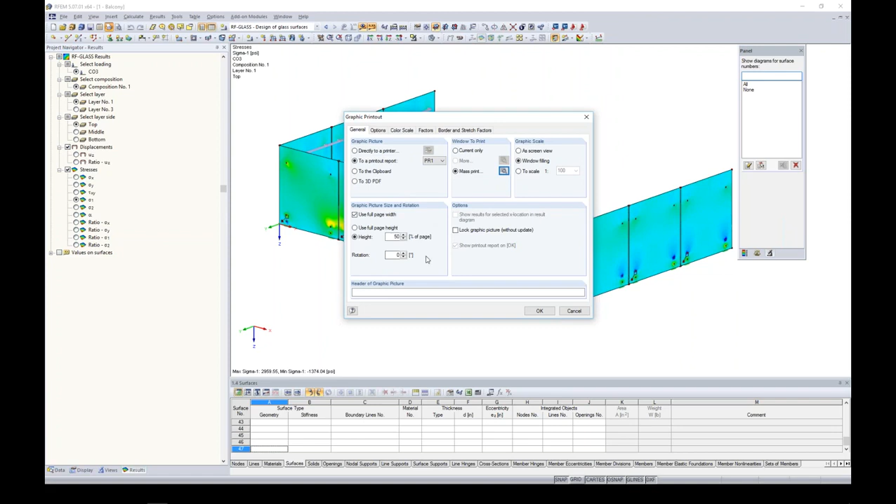For us, we have this option called mass print. If I go into the details of this under my results, I see all of the results I'm viewing over here, and now I can select all of these stresses, including my ratios. If I click OK, maybe I need to set the size of my picture—I can set it at 50% of the page, that's fine. I click OK, and the program automatically creates all of these pictures for us and puts them directly into the printout report.

I think our printout report is one of the strongest features, especially in comparison to a lot of other programs you're used to. It's laid out very nicely, and you can see the pictures were automatically put in based on all of those different stresses. I can jump through them in the table of contents or just view them graphically, and everything was automatically put in there.

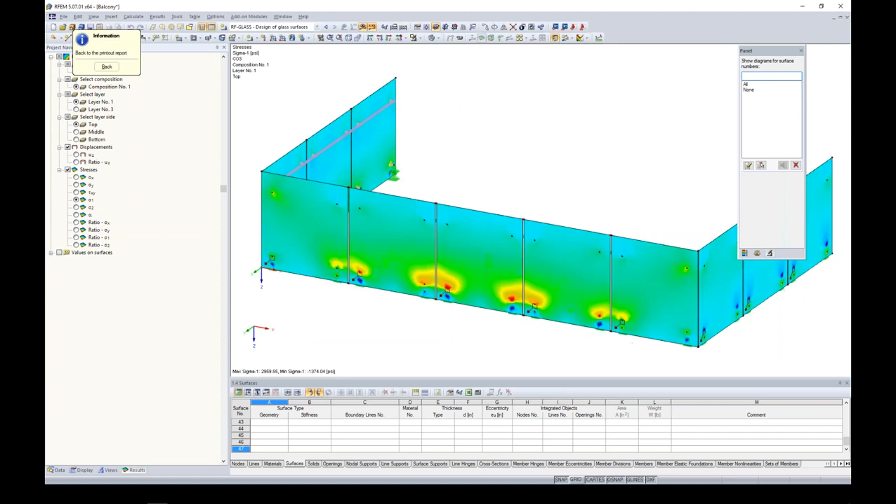Let's say for this one I don't really like that view. I can click on edit, change the view to maybe a front view here, click back, and the printout report will automatically be updated with that new view, as you can see. The other important thing to note: if anything were to change with your model, like a loading, or if you rerun an analysis, these pictures all update automatically too, so you don't have to worry about going back and reprinting them if any slight change was made. That's something really nice about our printout report.

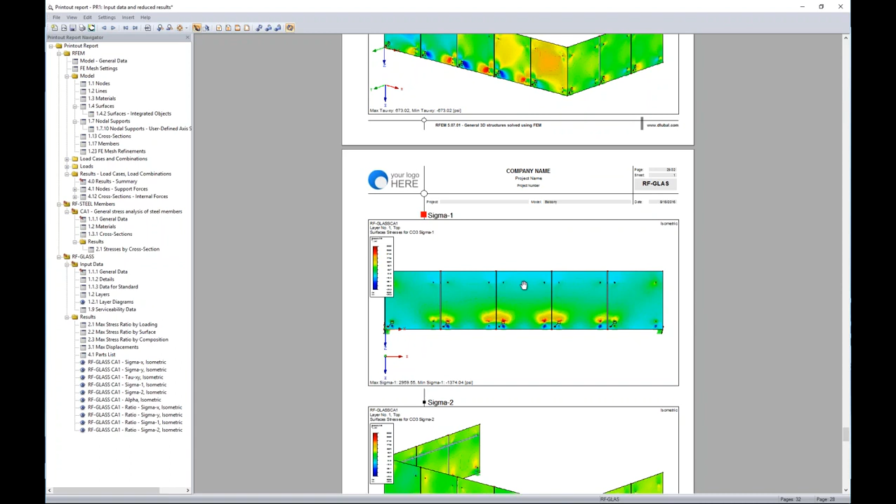Okay, so going back to the PowerPoint, we can sum up today's webinar.